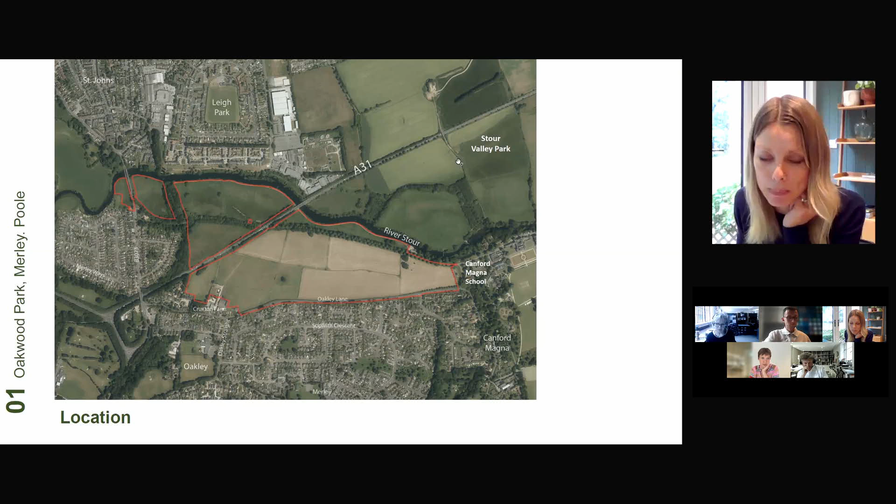A little bit about the site: it's a greenfield site, promoted by Richborough and released from the Greenbelt. It's roughly 46 hectares, and was allocated for residential use - a minimum of 500 dwellings, a care home, and SANG. We submitted an outline application, underpinned by a master plan and a design code, and obtained outline planning consent last year.

The site is effectively bookended by two conservation areas, one to the east and one to the west. This is the built-up edge of Merley, which is suburban and low density, and turns its back on the site.

The A31 is elevated. It's a trafficked route above the site, below which you have the river Stour and the associated flood zones, which affect the bottom part of the site.

In front of which there is a wonderful treed carriage drive that was a former private route to the now Canford School, and that is now a public right-of-way which crosses the site and leads directly into Wimborne, where there is an array of local shops and facilities.

Other considerations are that the site has challenging topography in certain areas in the centre. There are services beneath it that you wouldn't ordinarily know about. And there are a series of lovely trees and hedgerows, some of which are veteran.

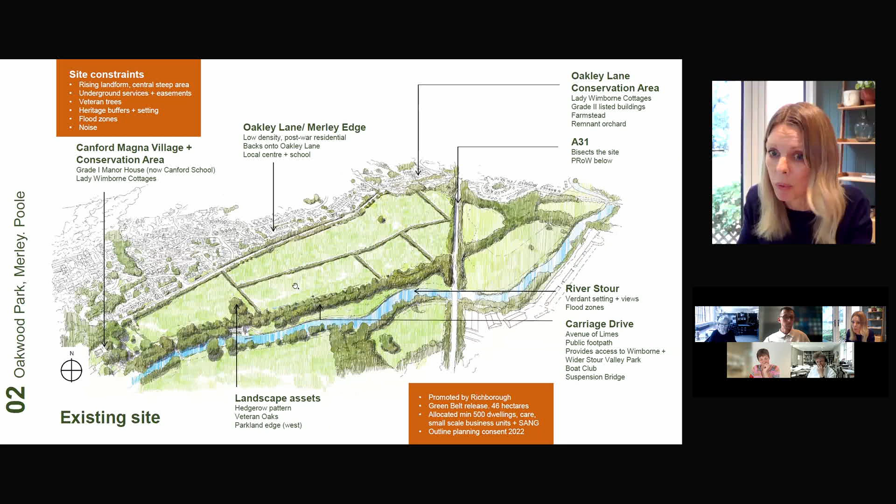A little snapshot about the context. The images on the left here show Canford Magna Village, wonderful arts and crafts buildings, rural character landscape led. This is the approach into Canford School by the side of the site.

These are locally regarded cottage pairs known as Lady Wimborne cottages, which have a distinctive buff brick, Gothic style arched windows and a gable front design.

Along the carriage drive here, you have a wonderful Victorian suspension bridge, which gives way to the Stour Valley Park. This is the carriage drive with the site on the left-hand side rising above it. And this is a wonderful gateway bridge known as the Lady Wimborne Bridge, which signifies the entrance into the carriage drive as you move off the streets that lead into Wimborne.

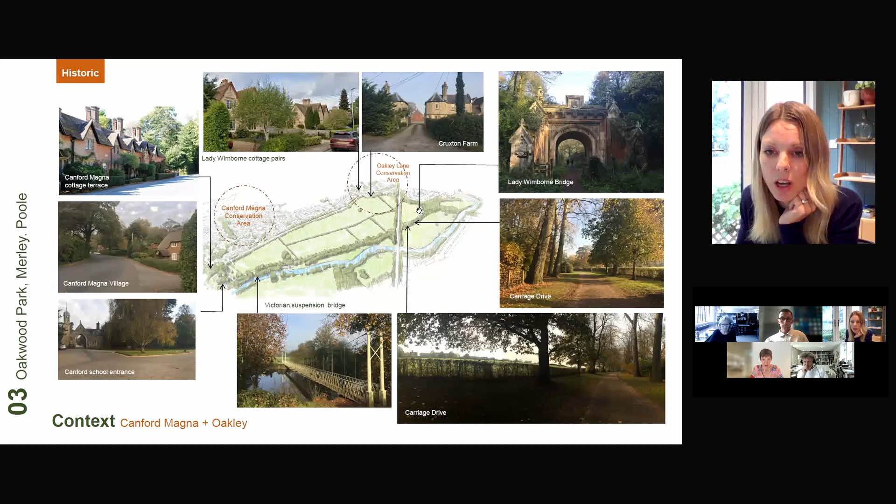So the street design is founded on an organic, deformed layout, and it aims to create a well-connected, safe and attractive environment that funnels movement, cycle and pedestrian movement down to the carriage drive, which acts as the linchpin for the overall movement and green space strategy.

The layout and patterning of development is founded upon best practice urban design principles, so it's block structure really, and aims to create a series of locally inspired development character areas that stitch into the setting of the site and its surroundings. But inclusivity is at the very heart of this scheme.

Its size and scale afford the opportunity to increase local housing choice, affordability, and mixed tenure housing, including care, adaptable housing, self-build plots, providing for people at every stage of life.

This is all predicated and founded on an extensive new parkland and SANG, which opens up the site to existing residents and new, and fosters community spirit. A series of green corridors stem from Oakley Lane, from the existing neighbourhoods, and give way to a new neighbourhood park, children's play, nature trails, communal food-growing areas, ensuring that access to green space and nature is easy and meaningful.

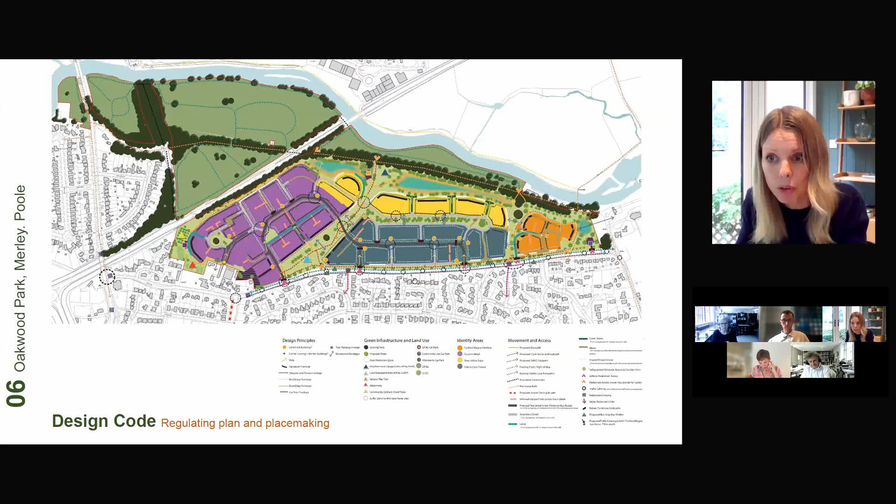Those parameters are tied into a structuring plan. So this is a regulating plan, which captures the placemaking principles and all the parameters. The areas I'm going to focus on today are the four coloured areas, which are the identity areas. These are extracts from the design code.

So each chapter details built form and landscape together, and it uses a series of sketches and annotations and lots of precedent images to convey the functionality of each character area, its response to its context, and also its role as part of the overall master plan.

The area I'm going to talk about first is called Cruxton Mead. It's the purple area that responds to the conservation area over here. It's the mid to high density area, which provides a series of gateways. The emphasis is on family housing, and it takes cues from the hinterland around the more historic parts of Poole and Wimborne.

It's all focused around a central formal tree-lined street, which gives way to a series of side streets, mews and edge lanes. The streets are punctuated at a series of points with widenings that create a series of informal parks, greens and squares. A traditional vernacular is in mind for this area, using varied building designs so that the townscape dominates and buildings lead the way as you move from one part to another.

Along the edges, we identify opportunities for landscape restoration. There are some areas that remain from the agricultural uses associated with the site, which could be enhanced and drawn into new green spaces. We identify the opportunity for new built form to replicate some of the architectural forms of the Lady Wimborne cottage styles around, so the imagery and diagrams relate as much to landscape as they do to built form.

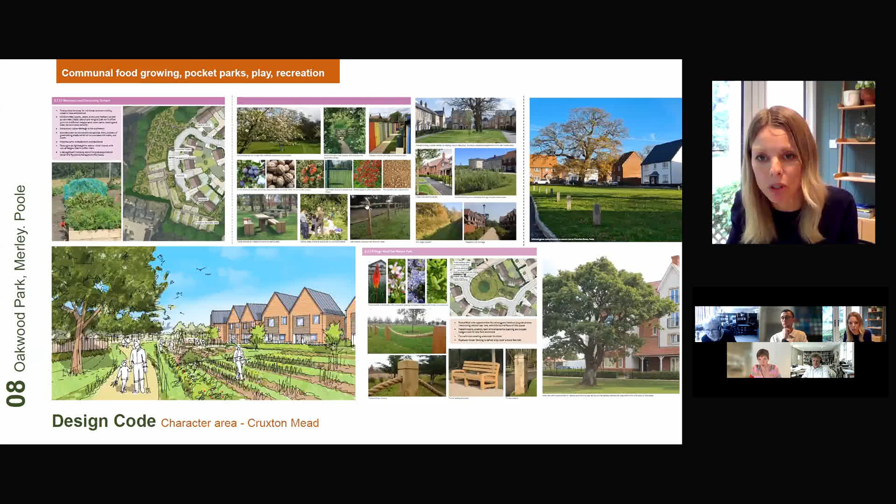The next area is called Oakley Lane Formal. This relates to Merley. It takes cues from the formality of the historic parts of Georgian and Victorian architecture in Wimborne and Poole, and creates a series of additional gateways that tie up with streets to the Cruxton Mead character area, with more continuous frontages, an active frontage onto Oakley Lane Formal, with key building groups and perhaps some taller buildings that define a series of entry points.

Having lots of entry points into the scheme was important for us because we wanted it to be as permeable as possible, but also entry points are helpful from a delivery and phasing perspective too.

The density degrades as it comes into the centre of the site, where it overlooks a new treed glade. That glade soaks up an awkward level change as part of the green infrastructure and creates a natural break to a new character area in front of it, which addresses the character of the carriage drive.

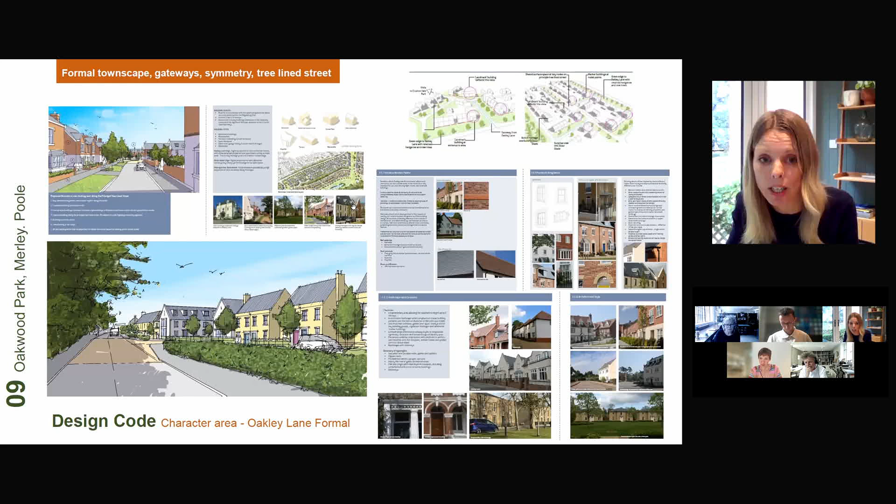Which leads me on to that - this is the Stour Valley Edge. This is a response to the carriage drive and the Riverside setting beyond it. It takes cues from the St John's area of Wimborne, with references to the Canford estate threaded throughout it.

It creates a semi-rural setting by way of more loosely arranged blocks with sylvan views of the carriage drive. Green mews across the development blocks range on a north-south axis, allowing street trees to permeate through the area and then relate to the parkland setting that surrounds it.

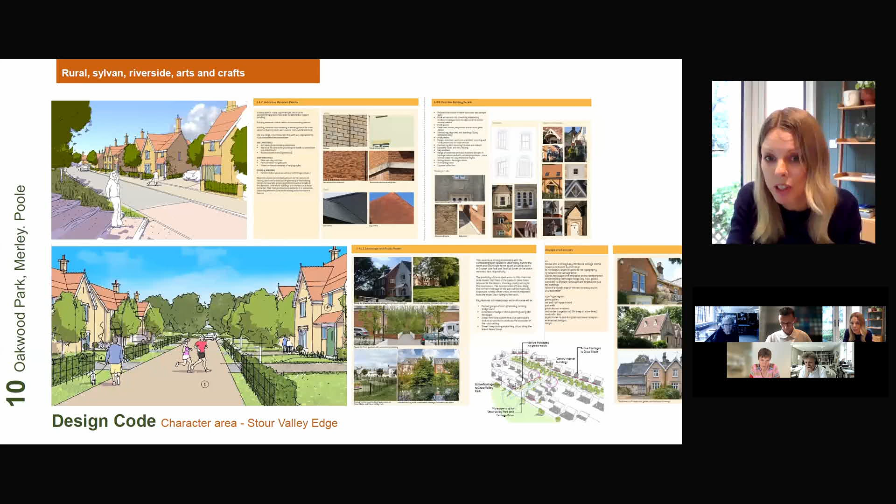Key features of this space include a crescent-style space which envelops a series of veteran trees next to the carriage drive, streets that give way to views of the carriage drive, quiet edge lanes with generous frontages for landscape, but also a very meaningful landscape buffer along the full length of that carriage drive, which is opened up for pedestrian and cycle access, and features a secondary avenue of trees, which protects and safeguards that tree character of the heritage assets.

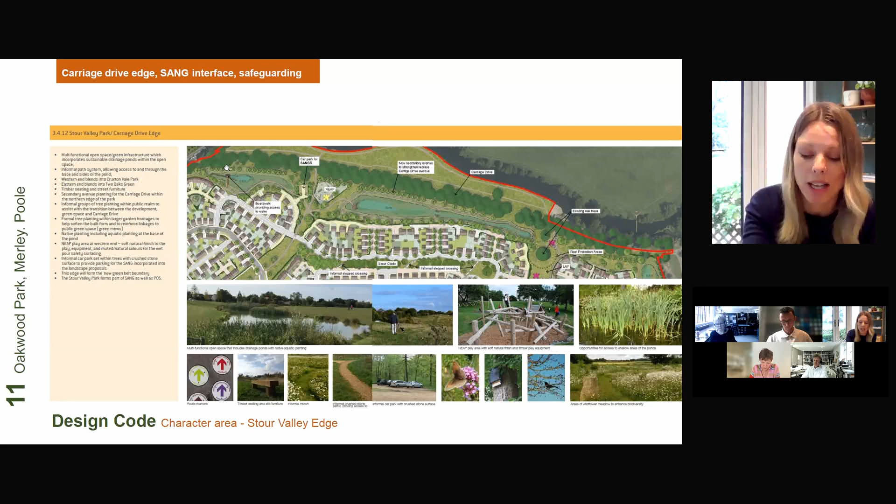The last area I'll describe is the Canford Magna interface. This is the area next to the school, and it's hinged on the provision of a series of very well-considered buffers. These were tested through discussions with Historic England that create an appropriate edge treatment to the carriage drive, the school, and the edge of the conservation area.

A curved Dorset terrace leads you into the central part of the site, which is terminated with a view of a new Lady Wimborne cottage pair, from which a series of quiet lanes branch off.

This area aims to create an arts and crafts style frontage to Oakley Lane, car-free frontages that complement the buffers to the carriage drive and the approach into the school, and a series of splayed building lines that incorporate views of existing Lady Wimborne cottages into new streets and open spaces.

To finally conclude, we produced a series of watercolours to assist our discussions with Historic England. These are some of them. This is the Canford Magna area I've just described, showing the curved Dorset terrace and how Lady Wimborne cottage adaptations could be incorporated into a new parkland, and this is the carriage drive alongside it. These were really helpful for discussions with members and the planning authority.

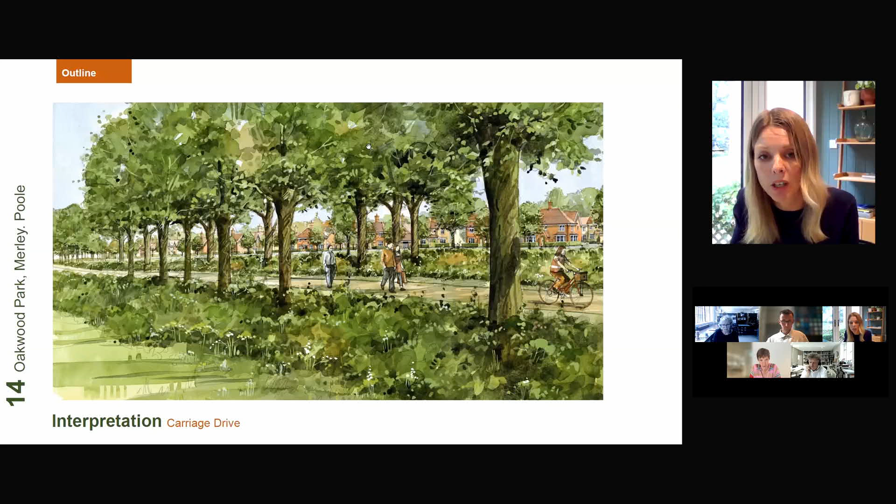This is a view of the Stour Valley edge I've described in front of the carriage drive, and you can see the secondary avenue just behind it, with the frontage very much being subservient to the sort of landscape features that define it.

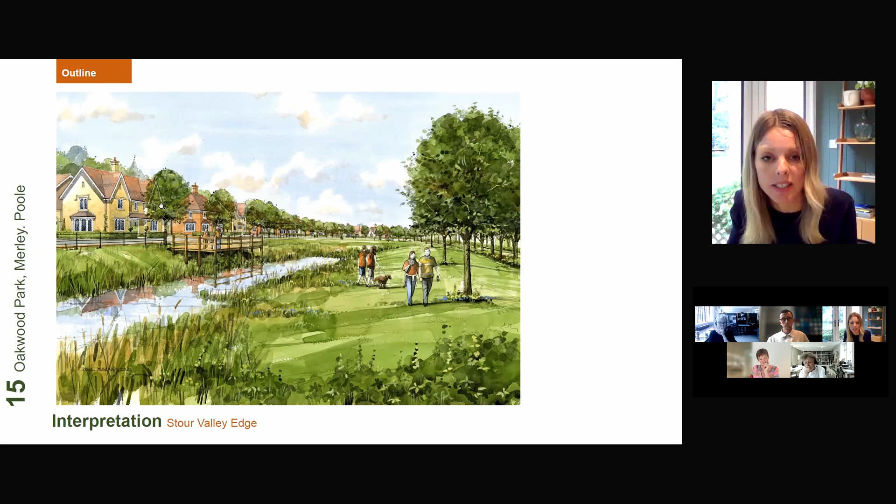This is the view from within the site. Because part of the edge and the buffer to the carriage drive envelops a series of flood zones, we created a series of ponds and basins with pontoons and boardwalks that allowed that area to be used when it was more wet, with a lovely frontage featuring Canford estate architecture in the vernacular.

And then finally, a view of a pocket park in the Cruxton Mead area, the first area I described, all focused around a really lovely oak tree. You can see the traditional vernacular is reflected in these buildings here.

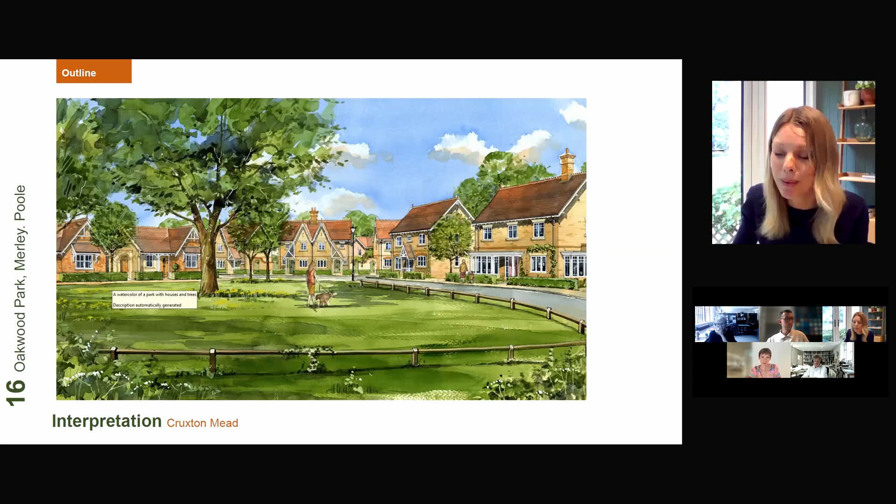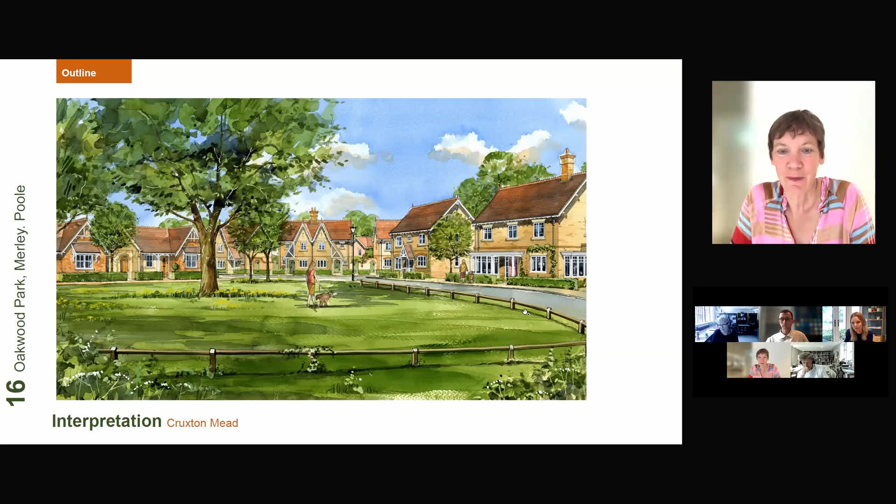Thank you very much, Charlotte, for talking us through the project and your submission. Anyone else in the audience, please do add questions for Charlotte into the chat. There's one question from the judges: how are you going to take this forward once it has outline planning? Who's going to deliver it, who's responsible for the delivery of this vision and the quality, and who will look after the landscape in the future? Do you have answers to those questions already?

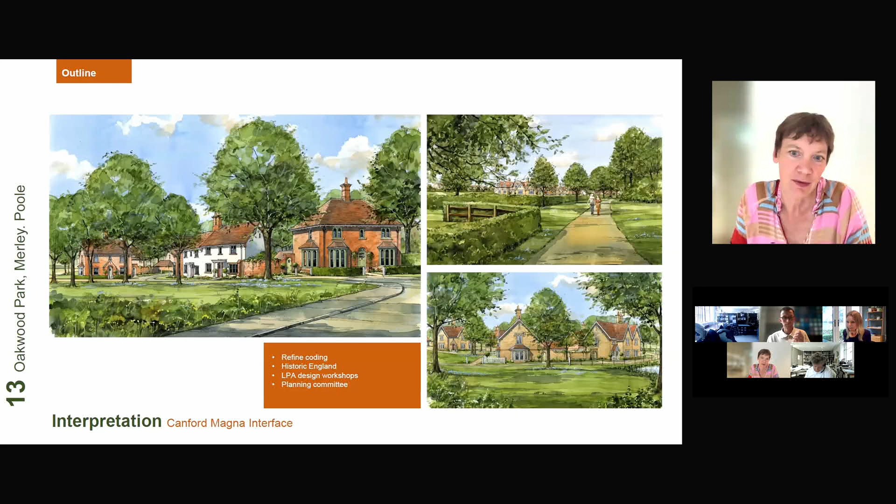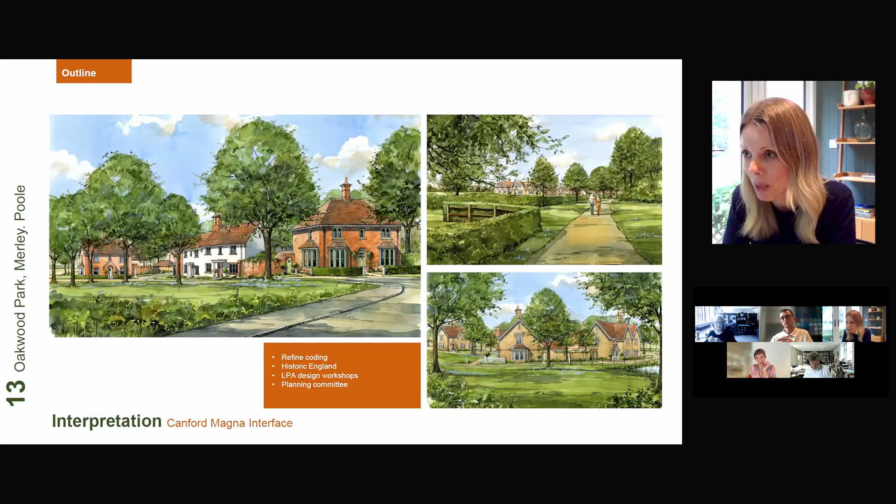There's another one from Jim Selby asking how the SANG is accessed. There was a requirement for the SANG to come forward at the earliest stage of the development, I think by first dwelling occupancy. The SANG is accessed via a green corridor link that stems from Oakley Lane. I'll just show you: this area flows from Oakley Lane down towards the carriage drive, and streets deliver a SANG car park, then you use the carriage drive and the public right of way to access the SANG, which is this area here.

Does that answer your question, Jim? I take that as a yes. I hope so. Are there any other questions from the group? Otherwise I would ask, what was your biggest challenge in this project in terms of creating and taking forward the vision and the quality you're seeking?

I think two things. The concept, agreeing the approach with Historic England, was a key part, and we involved them at every stage. But it took some negotiation and was fairly difficult sometimes, because this is an outline scheme, and deciding where you draw the line on detail, and how relevant that level of detail is to demonstrating your principles are right for context, was sometimes a struggle. We felt the outline scheme was being drawn into unnecessary levels of detail that might be restrictive for designers at the reserved matters stage.

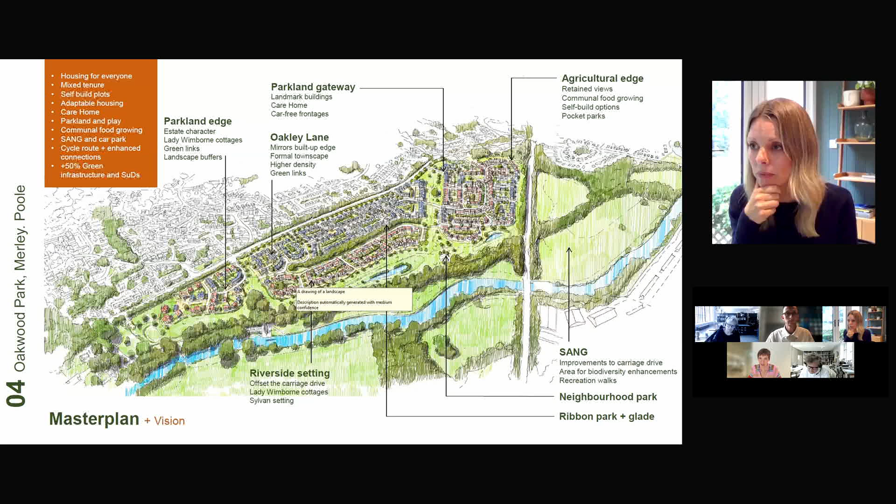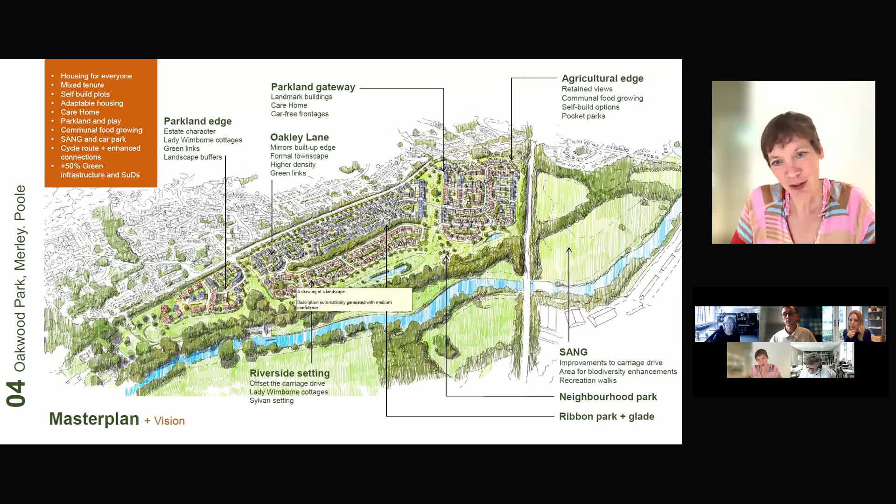Another question from Angela: how did you secure the typologies, especially the terrace housing? Sometimes that can be a challenge to get new terrace housing built. The typologies of housing weren't fixed. Each character area explains the density approach and the intent, the response to context and its role as part of the overall master plan, but it shows a series of building types that could form part of that context, using precedent images to show how they might translate themselves as part of a detailed design. But the onus is at the detailed design stage to show how those terraces might manifest themselves.

But does the code have minimum density requirements? Are you setting a minimum density that the development needs to achieve? Yes, it does. The density range is between 20 and 38 dph. So you can see that those densities respond - this is the density plan, and those densities respond to the character areas.

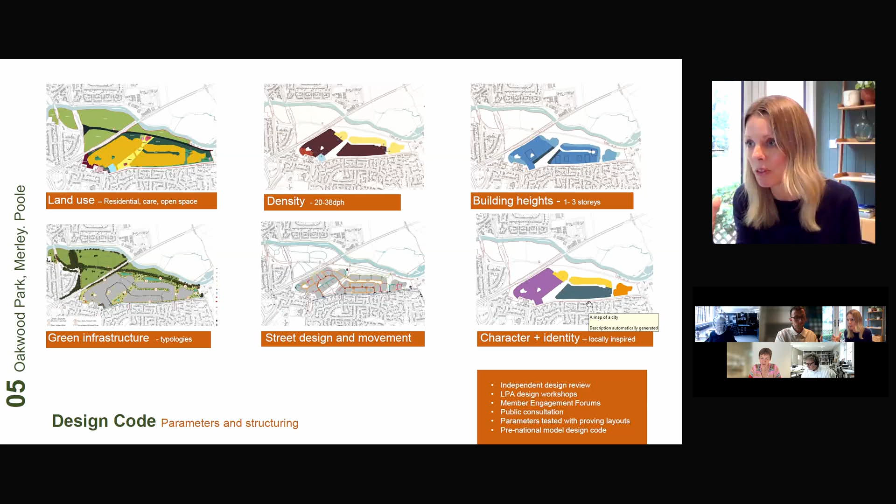One last question, a tricky one from Jennifer: how would you define the success of this master plan? How do you measure success in your company? Personally, I think it's good to be recognised and to be able to present at this stage, but also good to see how the design code has been translated through the Reserved Matters design. Perhaps I should have included that as part of this presentation, but because we undertook a testing process that proved these parameters at the outline stage, it designs out hidden things that can change the design at the detailed stage. So everything has flowed through just as we wanted it from between outline and Reserved Matters. I think that is the success for us, seeing how those ideas translate and manifest themselves as they go through detailed design and ultimately get built.

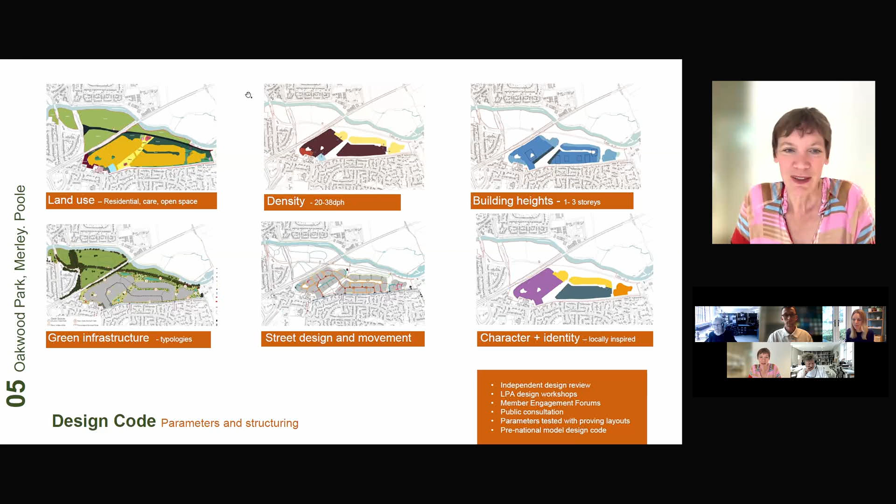It is the Lowline Commons, a much more urban project. The judges have identified the complexities for this project as working across several local authorities with business improvement districts, multiple land ownerships, and a very wide range of land uses. They recognized that it is effective in responding to its context and the different scales of intervention that were required, dealing with a very complex set of questions and challenges. So really looking forward to hearing about this project from James Blower from Macfarlane Associates.

Thanks very much, Katja. So my screen should be being shared now. Thanks for the introduction. My name is James Blower, an urban designer from Macfarlane and Associates. We're a placemaking agency based in London Bridge, actually in and amongst the study area for this initiative that I'm going to present to you now.

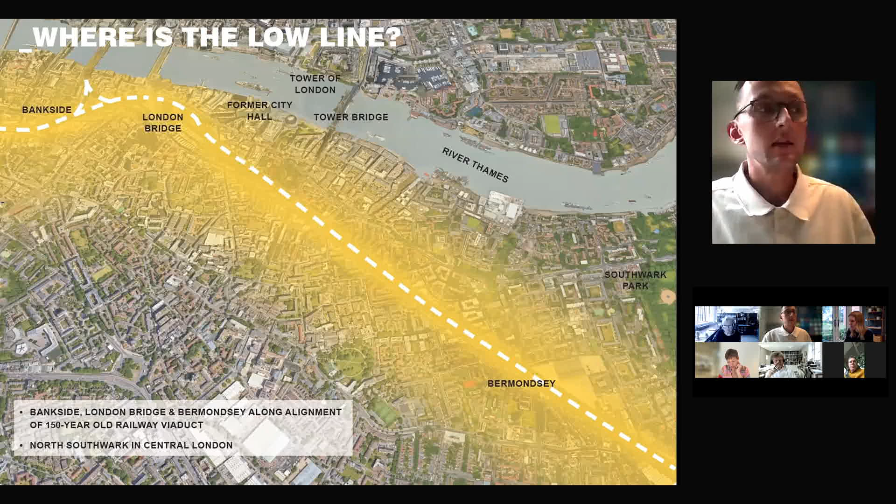The Lowline is a 2.5 kilometre railway viaduct that dissects the northern part of the London Borough of Southwark in central London, spanning very diverse areas such as Bankside, London Bridge and Bermondsey.

The Lowline was a strategic concept, a term coined by ex-architect and local resident David Stephens, who you can see up in the top right here. He envisioned celebrating the fantastic heritage of these 150-year-old railway arches, one of the biggest built structures in the city, by creating a new walking destination from London Bridge through Bankside and Bermondsey, connecting diverse neighbourhoods.

and communities, linking existing and new hubs of creativity along its course. The concept was developed by a group of partners around 2010-2011, and in 2019 they ran an enormous international open competition, which attracted about 100 entries from 35 countries. The brief was to create a green strategy under the umbrella of the Lowline, underpinned by the Victorian railway viaduct, increasing environmental resilience.

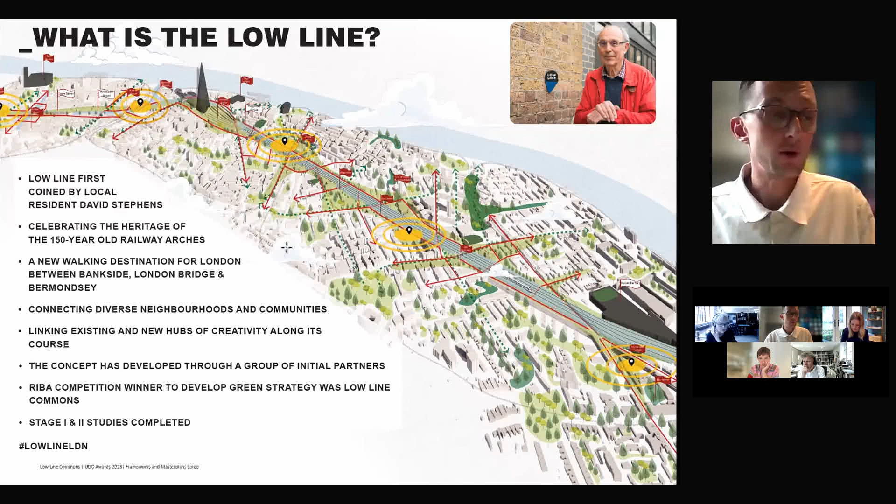Sorry, James, you're cutting out for me a bit. Is it just for me or is it for others as well? My apologies for that, I'm hovering immediately above my laptop.

So the Lowline partners are a range of organisations, but this was fundamentally pushed through by business improvement districts - Team London Bridge, the Blue Bermondsey, but first and foremost, Better Bankside. And it was our group of consultancies, designers, sustainability consultants and ecologists who devised the concept, the initiative, the Lowline Commons, which went on to win this RIBA competition, and was then funded by the Mayor's Good Growth Fund to the stage that it's at now.

So our vision for the Lowline Commons was that through the implementation of green infrastructure, this barrier, this viaduct, could become a green seam, stitching together a vast network of spaces that make up the urban fabric from Bankside to Bermondsey - capitalizing on increased permeability and connectivity, and using the viaduct as a common and unifying element to tie these networks of spaces together.

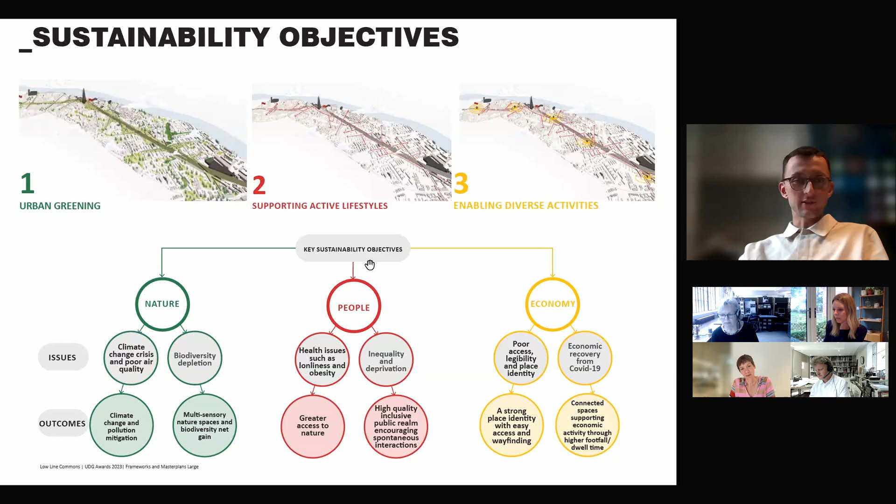As the Lowline dissects a huge array of character areas, we thought that to devise a strategy to bring this together as a cohesive whole, we needed to characterize areas based on character areas and design appropriate solutions for each. These also largely aligned with the administrative boundaries of the business improvement districts. So not only are the areas that the Lowline viaduct passes through diverse as character areas, the types of spaces that surround them are also diverse.

This mosaic of streets we categorized based on varying opportunities for interventions and urban greening. And I'm going to come back to this in a little bit more detail shortly.

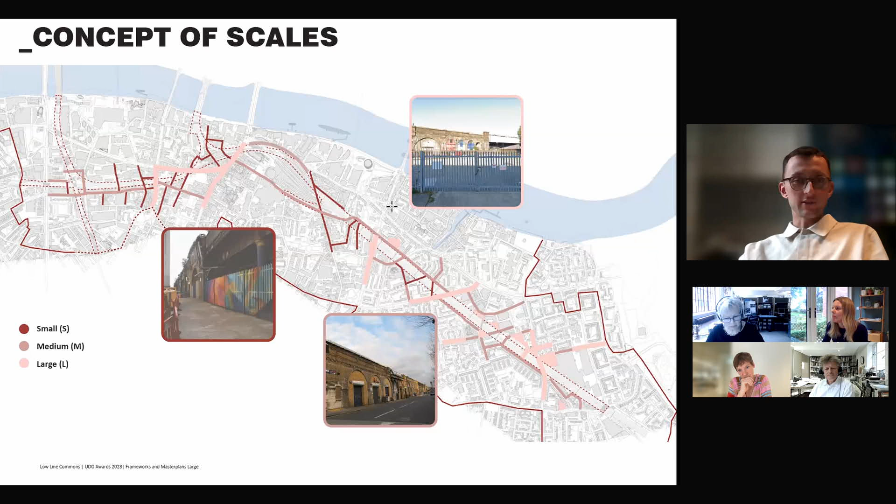So having these kind of lofty plans and dreams as part of this initiative would always ultimately remain that way unless we set ourselves measurable targets and goals that we could move towards and benchmark ourselves against. These targets were designed to ensure that nature is at the heart of the Low Line, and I'm sure you'll all agree these numbers are very laudable.

In a nutshell, integrating nature-rich streets along the viaduct has the potential to transform this area. Anyone who knows it knows that it's devoid of nature at the moment, largely. Creating more welcoming spaces and forging the idea of an identifiable green seam, bringing people and nature together, and ultimately contributing to London's status as a national park city, the first national park city.

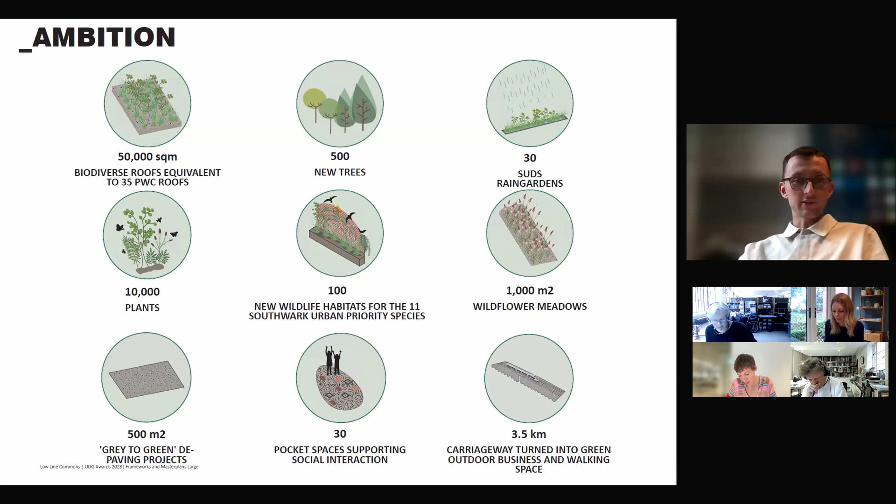So we looked to engage and bring along on the journey all stakeholders - active people and groups along the railway corridor - to ensure that the benefits of the Low Line extend far into the future, far beyond the days when I champion it as an individual and my consultancy are involved.

It requires the support of the partners along its length, making sure that the benefits reach far into their communities. Translating sustainability into practice is a way of encouraging a shift in mindset, challenging the status quo by demonstrating the potential of green infrastructure - a truly regenerative approach.

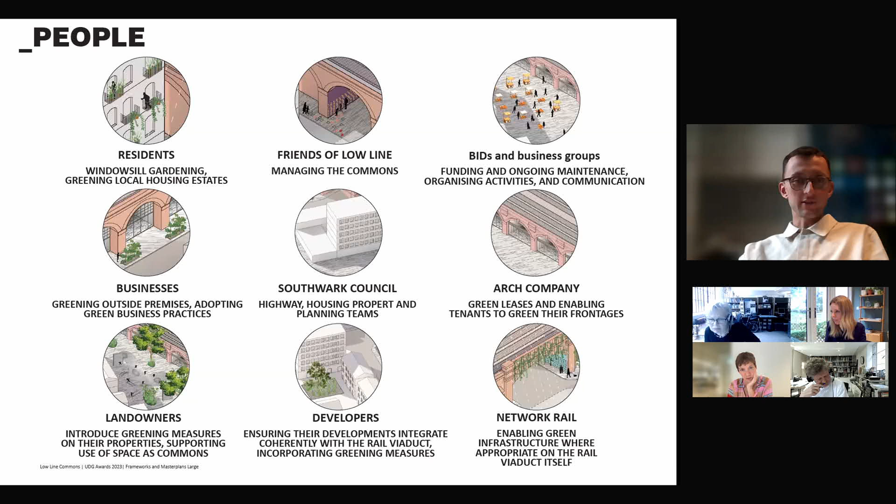Our intention through the development of this wider strategy was to make the whole greater than the sum of its parts, binding the impetus and passion from these local organizations, these great local scale tactical initiatives, under one strategic umbrella, offering stakeholders a guide to planning, designing, and ultimately bringing to life projects within the umbrella of the Low Line. Shared action and engagement by a different range of stakeholders, creating a positive environment for shared benefit.

It's a powerful unifier, a bank of inspiration for local stakeholders to draw from. It's not meant to be prescriptive in any way, but a springboard for creative ideas - merely tools that can be adapted for place-specific solutions.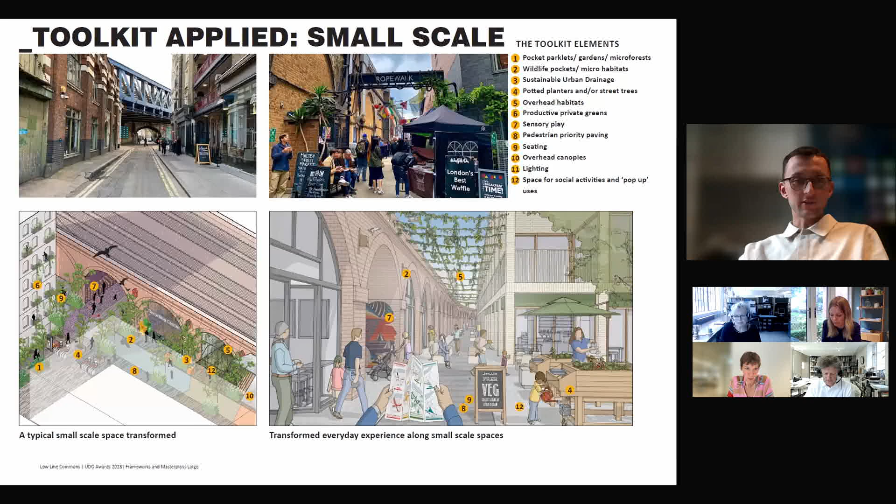So here you see how we envision the application of the toolkit in a range of spaces. I'll just flick through these as I speak. The physical characteristics of each space, of each scale of space, offer different opportunities for people, nature, and enterprise to flourish. So scale will have an important influence on how our interventions are delivered.

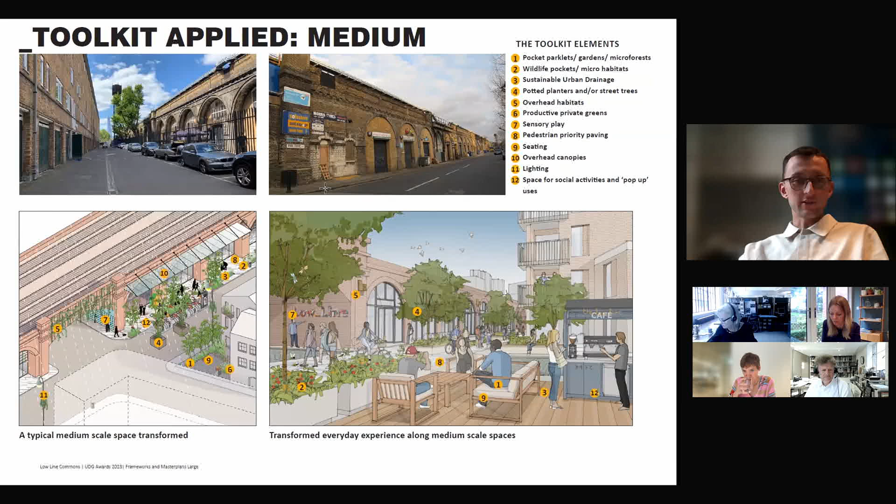Sense of enclosure being a key one, space and priority for vehicles and parking, and of course environmental factors like sunlight and shade.

You can see this key on the right, which indicates how we envision the toolkit you saw on the previous page being applied in each of these spaces.

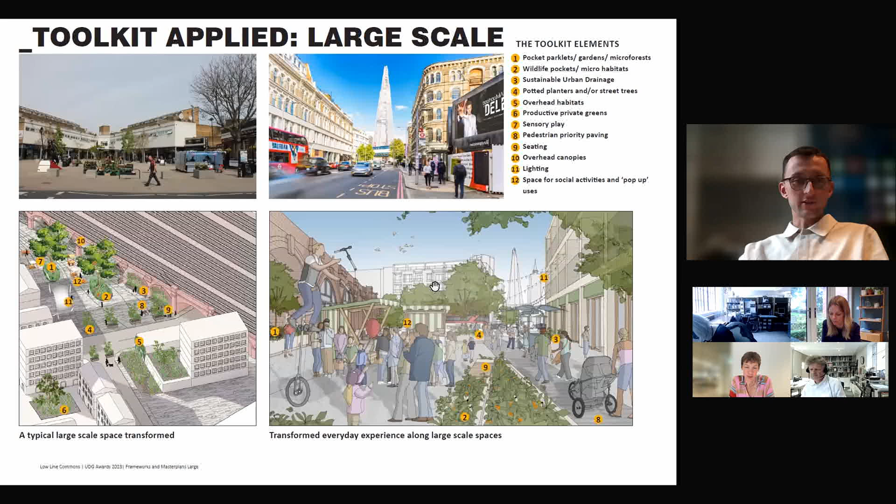These studies are a kind of critical resource, really, an enabling framework, a springboard for ideas for everybody committed to transforming the low line and the immediate context, this part of London, from a piece of transport infrastructure acting as a barrier to a robust green corridor which brings together these diverse neighborhoods.

Taking the thoughts and designs from this report to something tangible and real is the ultimate goal for all of us. For this to meaningfully benefit the community, it requires a robust engagement strategy to discuss the vision with local stakeholders and devise a shared plan for implementation.

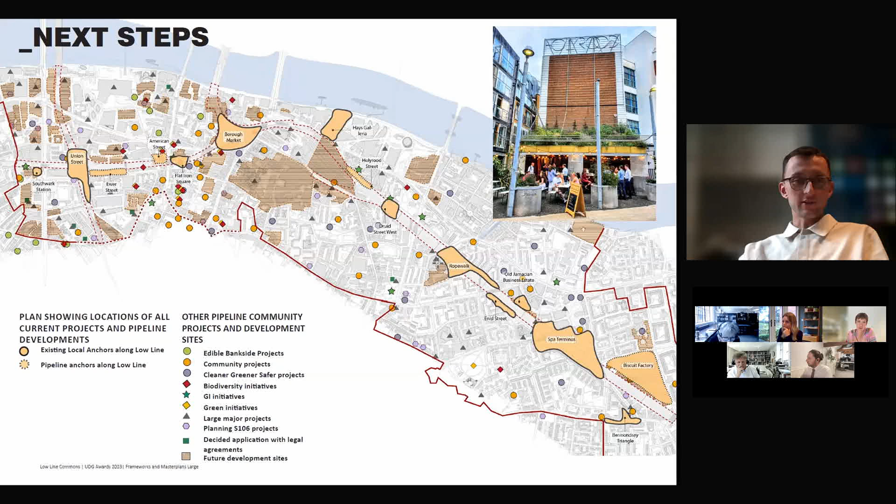So I'd like to just close by saying that we really think this is a truly regenerative, truly unique, bottom-up participatory regenerative initiative - by the people, for the people, and with the people, inclusive for all, but importantly, making new places for people and nature to thrive.

Thank you very much, James. Thank you for talking us through it. It's kind of truly diverse and complex project.

And again, I ask everybody to put your questions into the chat. I will start off with one question that came from the judges' comments. You've talked already a little bit about the delivery mechanism. So the challenge is lots of great ideas, and as you say, a toolkit and a springboard for inspiration. So how does this become reality? There are so many different partners involved - Network Rail, the local authorities, and private landowners. Have you had conversations with all of those, and how was this kind of received, and are they ready to implement, and how?

That's the $1 million question, Katja. Yeah, we've been talking to the stakeholders, and ultimately some more than others are on board - I won't mention any names about who those are - but it does require buy-in from each of the key stakeholders, because with this myriad of land ownership, it's impossible for the vision we have for the entirety of the railway corridor to be transformed in one go.

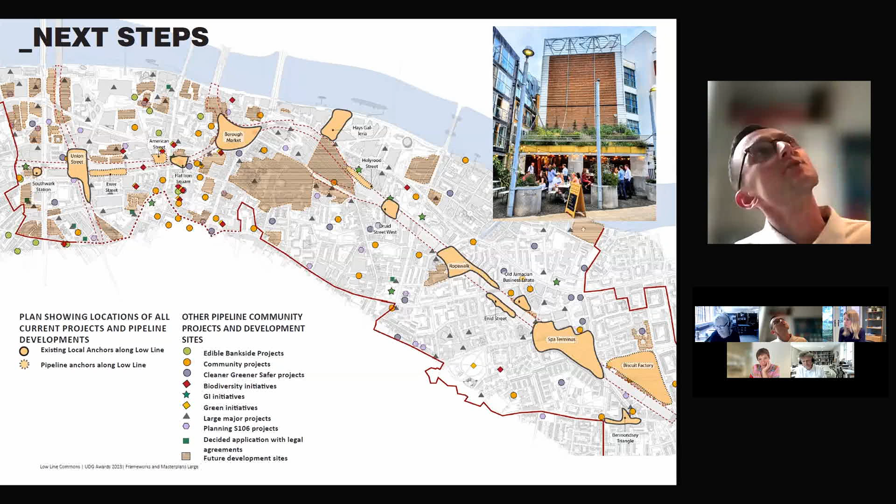And they're acting as catalysts for further regeneration, ultimately encouraging the other stakeholders who are big organizations - they're harder to move, harder to persuade - to also get involved more, because this is a win-win for everyone. So the decentralized concept is both the great thing about the low line and the hardest thing about it, because there's no one organization leading it forward. But that's what's exciting about it - it's interpreted in different ways, coming forward in varying degrees at varying points along the low line. Yeah, thank you for that. That was a very long-winded way of answering your question, I'm afraid.

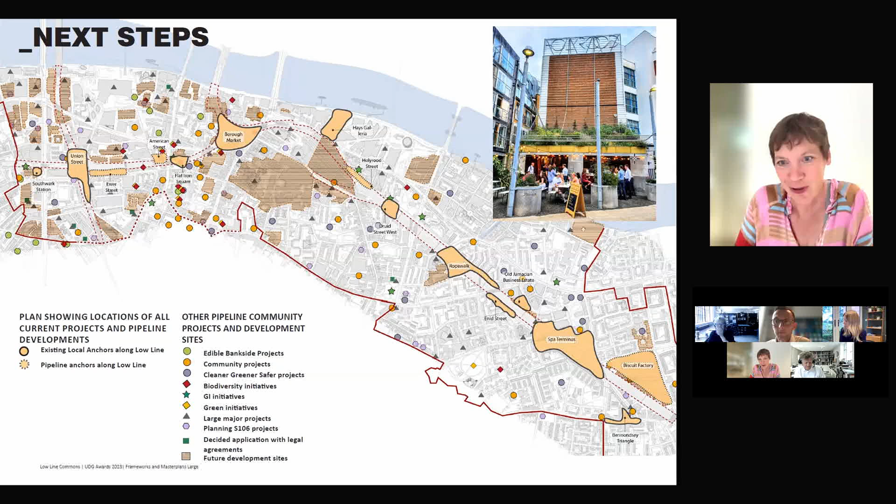That answers my question. And I think, we are based in this area as well, walking around it, seeing the transformation - it's really good. And I must admit, that railway cuts through all the urban fabric. I still get confused constantly in the area, crossing under the railway, and it would be a great piece of work if that comes forward, connecting all those different dots. Absolutely.

One thing I was going to say is that within the umbrella of the low line, just to give a greater understanding, the initiative I just presented is one strand of it - the greening, the green infrastructure strand. There's also a movement strategy, which involves punching through some of the arches to create better permeability - that's another strand. And the final strand is about installing prefabricated modular corrugated units into the spaces themselves, which are easy to put together and mount, cheap, allowing local businesses to use these spaces at very cheap rates. So it's a cohesive strategy when you look at it entirely.

I mean, there are a couple of questions. One is about - they're businesses, they're stakeholders, landowners, but they're also residents. So have you thought about giving the residents almost a kind of right to green, so they can do their part of it? And then there was another question: how have you dealt with the naysayers or the lack of chronic resource shortage for public realm and other strategic public works?

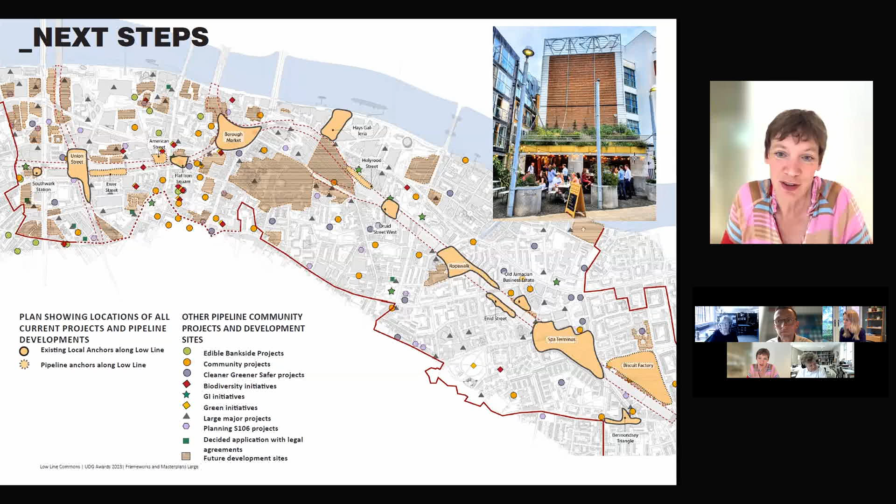Yeah, I can take the first one. I'll flick back to this page because it's amazing when you see the amount of work, the amount of initiatives that are going on and have been going on for a long time - some of you here might know about some of them. The champions of each of these initiatives are different - some are local non-profits, some are groups of residents within council estates who just wanted to make their immediate environment much more pleasant to be in. So there's already the will there of these people, these groups, to be involved and to create a nicer place to live and work and be in.

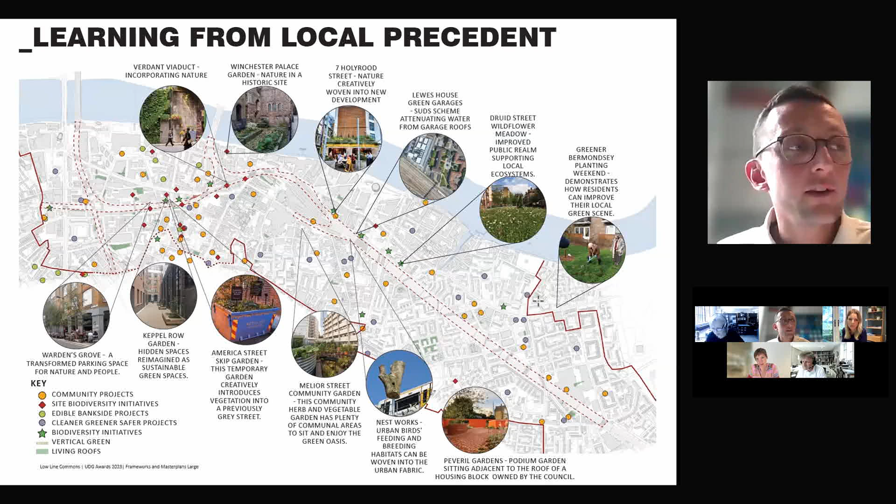So I hope that answers that question. And the chronic lack of resources, yeah, I think there's probably no shying away from the fact that the council aren't going to be the people to push this through.

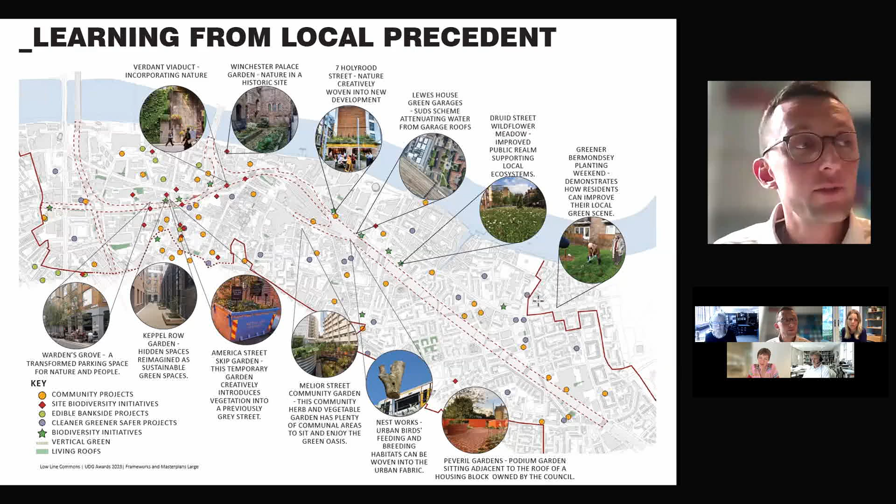But I flick back to the lowline partners. You can see there are other organizations that have greater financial backing, and whose interest it might be to engage with us as a team to bring certain initiatives under the umbrella of the low line, because ultimately it increases the value of their asset.

I'll leave it up to you to work out who I'm talking about here, but I think there is always money somewhere for this kind of stuff. It might not come all at once, but that's fine. The way we've set this initiative up is that it trickles in, into one initiative which then catalyzes another, and over time the area changes and improves.

So I don't think any of us envision that there needs to be immediate buy-in from everyone and money up front. There's one last quick question—you can see them in the chat as well and reply separately—about ongoing maintenance costs, always a concern, and whether that was discussed and dealt with in one way or another.

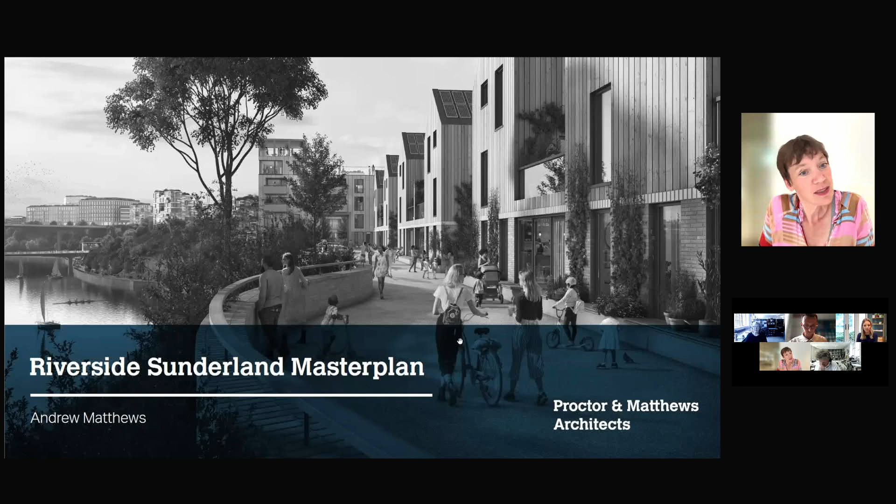And so now we're moving to the third presentation and the last shortlisted project from Proctor Matthews, Riverside, Sunderland. The judges recommended it as a long-term vision for regeneration of both banks of the river. It really converts an existing river backside into new city frontage, with a strong identity that links well to the industrial past. So let's hear from Andrew about the project in more detail.

So this is Riverside, Sunderland—quite an amazing project set right in the heart of the city, where there's quite a lot of vacant land. The overriding ambition for Riverside, Sunderland was to create an internationally recognised city centre development, but also, which I think is sometimes unusual, to think over a very long period of time about what kind of environment 21st century living could be in an older industrial city like Sunderland.

You can't really realise these projects without mentioning the incredible ambition of the client here, Sunderland City Council. This work was undertaken alongside Faulkner Browns, who looked at the central business district, and also Camlins, who were part of the team because there's major green infrastructure here. The headlines were innovation and research around sustainability—Sunderland wanted this to be, as far as possible, a net zero carbon development. They wanted us to draw on the local history of Sunderland and make a development about the context of this place, not a ubiquitous regeneration project.

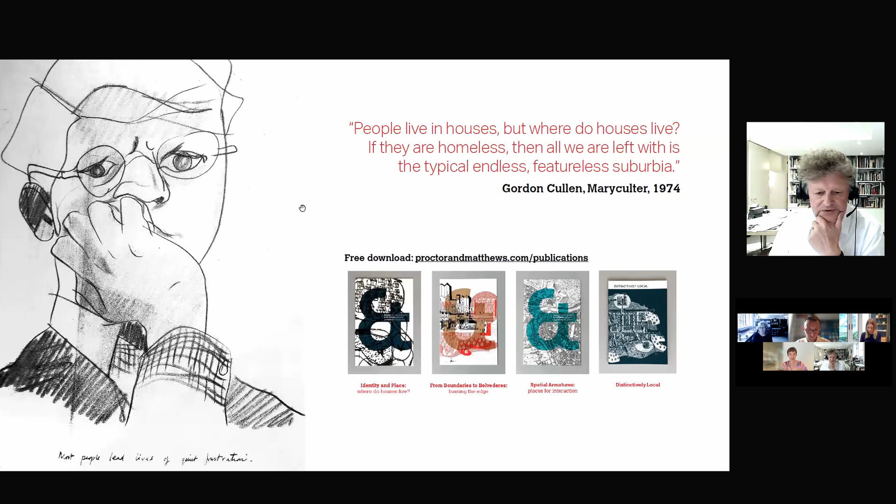This slide is quite interesting, and we use it a lot. It's as relevant to suburban areas as it is to city areas. People live in houses, but where do the houses live? If they are homeless, then all we're left with is typical endless, featureless suburbia. That's sort of what we always think about when we're trying to consider context and placemaking and the relevance of the cultural heritage, industrial heritage, particularly here of this place.

When you go back to 1768, what the Wear was, this verdant gorge, probably broadleaf woodland. You can see what it was like further west as you move up the river into the countryside. This would have been an incredibly wooded valley right down to the sea, running through the centre of the city, or the town as it was at that time. And of course, 100 years later, we see on the right, 1852, this amazing industrialization of the city, where in many ways both sides of the city turned their back on the river because it became so industrial and filthy, a sort of no-go area with coal drops that most people living in the neighborhoods would not really have gone to or known about.

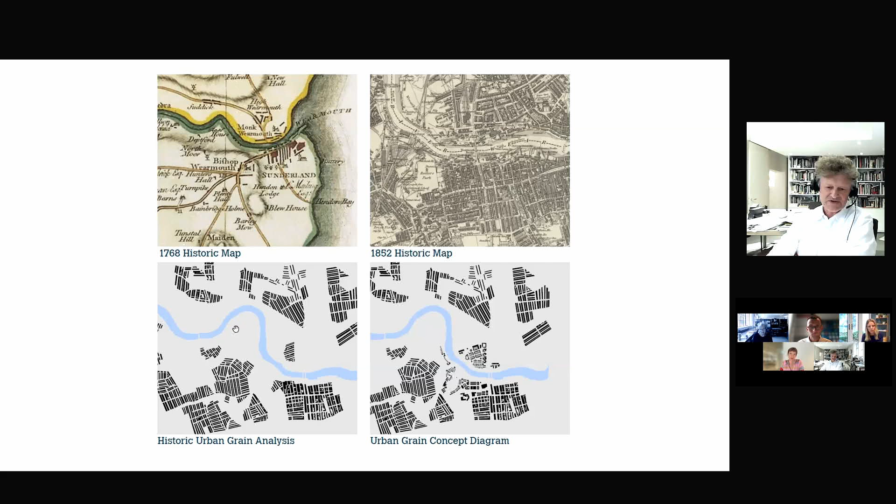There's a very peculiar thing that happens when you do a figure ground down there on the left. You get this quite unusual city grain, which we've not seen actually in cities before. When you draw a drawing like this, it tells you something about the morphology of the place. But it also tells you there are some unique things going on in terms of building typology that make up streets and characters that are really quite unique to Sunderland, and also unique to the broader northeast of England.

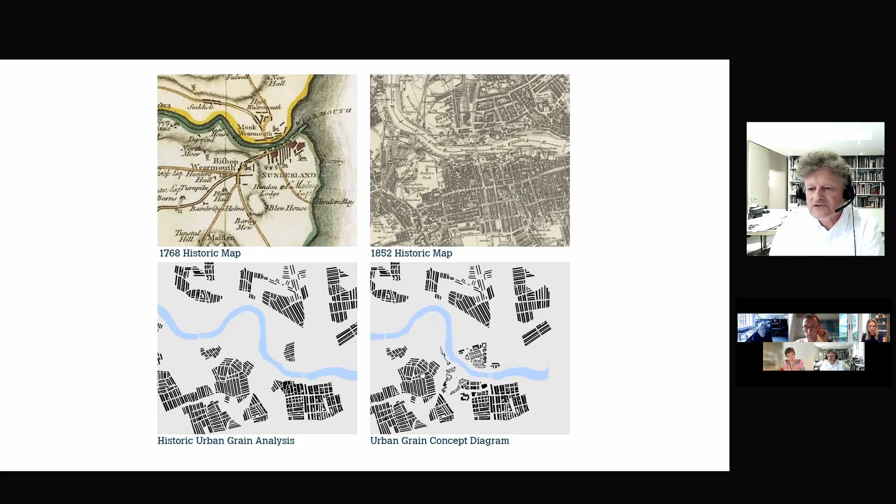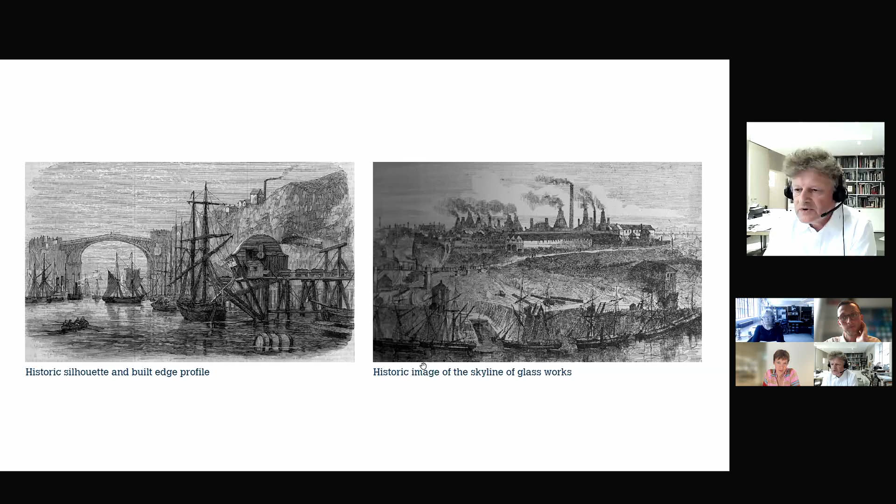Down on the right is the beginnings of our explorations of how you make interventions onto the river. These two historic images are interesting - they show what the industrial river was like, but also this amazing topography, a 30-meter gorge down into the river, onto the riverside, and the kind of industry of coal drop yards that occurred on the river, which was the only industry, and then the glass works and ceramic works that would sit up on the hillside, and the silhouette created of the city right above you when you were down on the river. So the silhouette is really important, I think.

So it's just some facts. This is 33 hectares of land, of which nearly 20 hectares are available for development. We want this to be, Sunderland wants this to be a carbon neutral development. They want to pioneer modern methods of construction and new technologies. There's to be 1,000 new homes here, schools, nurseries, more than 1 million square feet of modern office accommodation, some of which is currently under construction. The City Hall is currently under construction. There will be a culture house. There's the development of a life sciences building.

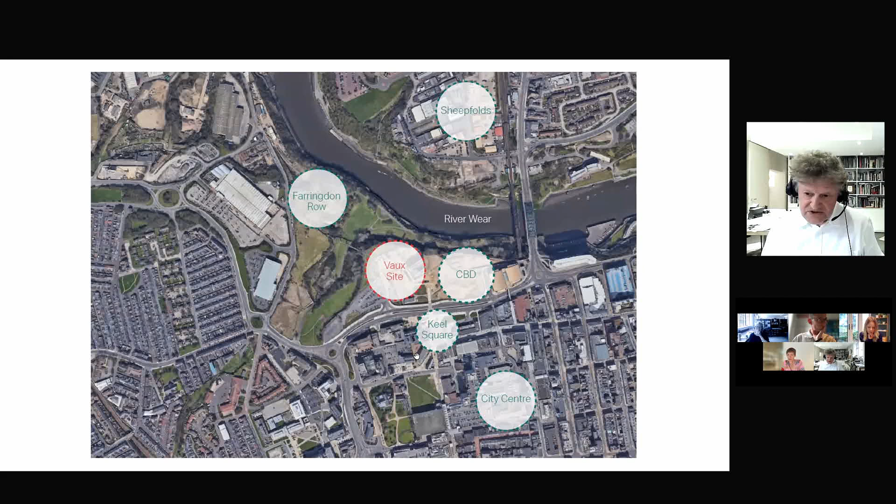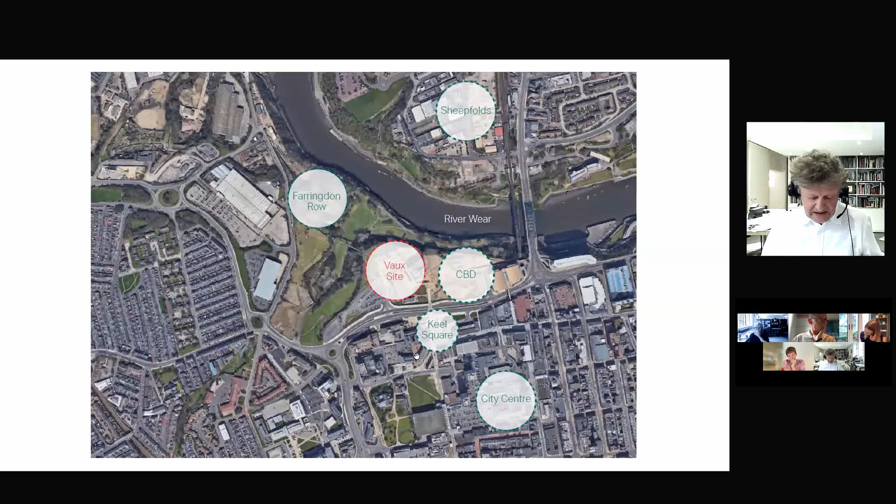There's this amazing landscape. There's the need to connect walking and cycling from our site down to the sea. And there is the opportunity to think about new infrastructure that can connect both sides of the river.

So here we are. Here's a view of the river, and you can see that even people living here, when we consulted them in Sunderland today, few go down to the side of the river because it's always been felt as a no-go industrial area. Even today, there's that sense that not many people go down to the riverside.

And yet there cannot be many cities in Europe that can sport such an amazing gorge running right through the centre of their town, and the opportunities that offers for health and well-being and the greening of a city into the future of this century.

So connections are incredibly important: the city connections, these neighbourhood connections across and down to the river. And then the site connections, these neighbourhoods we're looking at, Vaux, Farringdon Row and Sheepfolds, all of which nestle alongside the edge of the gorge looking down into the river.

And when you get to the edges of the gorge and stand on the top, the views up and down the Wear are absolutely spectacular.

We had a number of giggles among the audience when we were consulting residents of Sunderland, suggesting that they had something akin to an Italian hill town. And it wasn't until they walked out and saw for themselves just how special this was as a place that they began to understand there were some really amazing possibilities for the future of city living here in the heart of Sunderland. Sometimes it takes eyes from another part of the world to come and explain to people living in a place just how special it is.

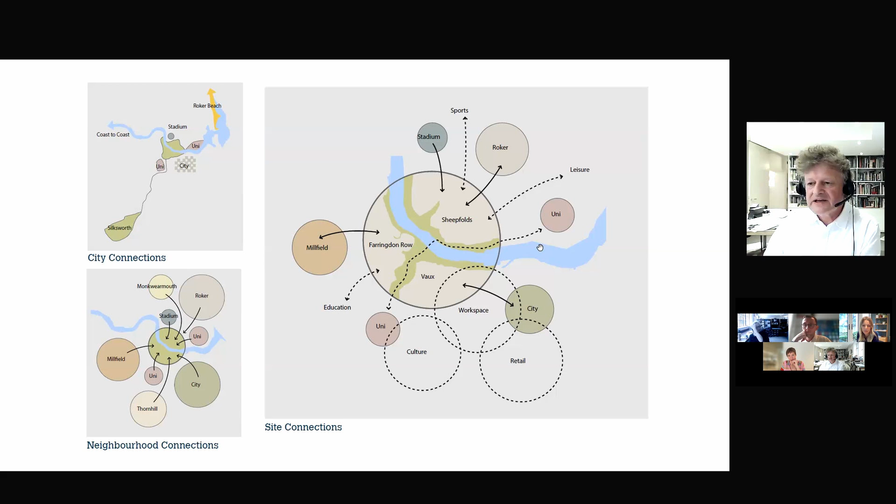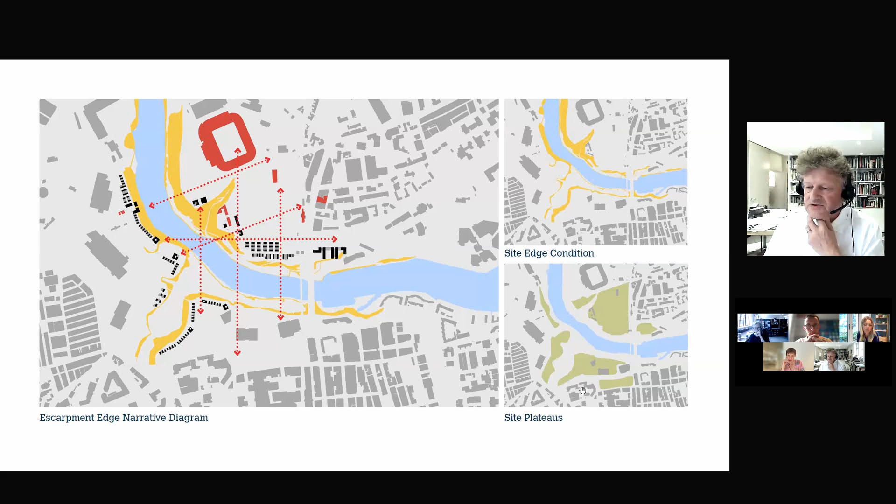So here's the edge condition of the escarpment shown in yellow on the right, and the site plateaus that are part of our site area that we are to consider development on.

And so an early master plan begins to work out how you can not only physically connect these neighbourhoods across the river, but also how you can visually connect them, and how we can take advantage in the new neighbourhoods of this new way of connecting landscape and living environments back to this city water lung that runs right through it.

And so strategic connections involve a new High Line bridge, which is funded, which runs from the Stadium of Light into Sheepfolds on the north bank, and will bring pedestrians right down into the central business district and Vaux, the new housing development, and into the city centre.

So this will be the first time ever that a bridge of that magnitude has connected north and south of Sunderland together. And then as part of the new Riverside Park, which has been designed by Camlins, which sits as a green lung in the middle of all of this...

...is a low level green bridge down at the lower level, which takes you across the river and connects you into all of the cycle and pedestrian networks down to the riverfront, to Roker over here, and then back into the citywide network to the south.

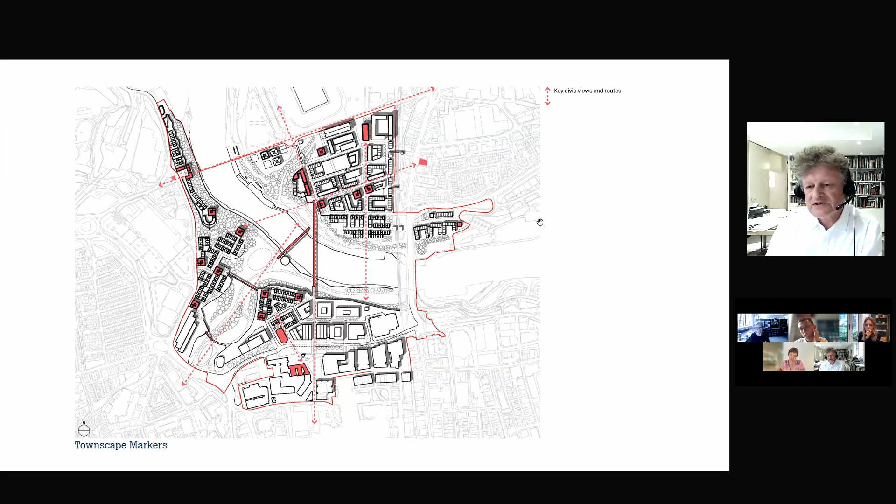So these two bridges, the Green Bridge and the High Line Bridge, are crucial parts of infrastructure that will be funded by Sunderland to connect the new neighbourhoods together.

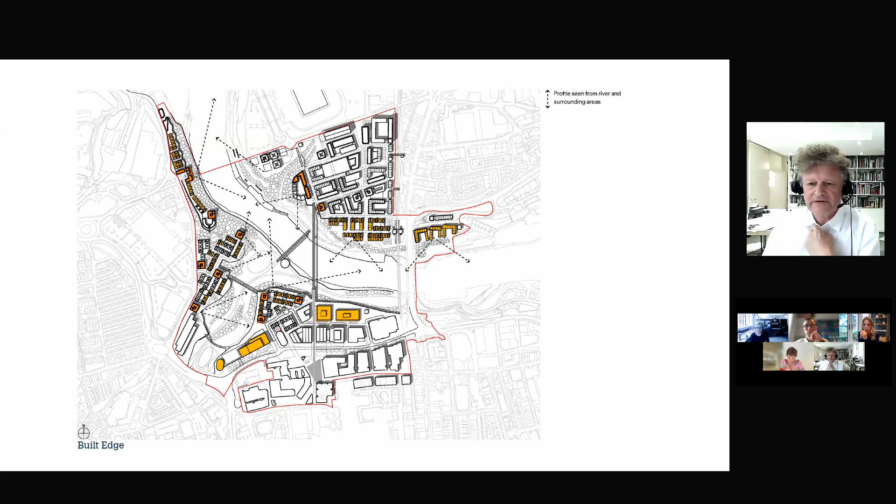And this is the built edge diagram, and we're beginning to think about how the buildings that sit directly on the edges of the river have a different morphology, different character, create a silhouette on both sides of the river, and how markers begin to address wayfinding, and how in the hinterland of those developments they respond to adjacent neighbourhoods.

So this is an early model which begins to show those strategic connections. We already have an existing pedestrian bridge across what's called Galley's Gill, another valley up here, connecting Farringdon Row over on this side to the development currently on site at Vaux. I hope people can see my cursor.

Okay, the low level green bridge, and then the high level bridge that takes you to the Stadium of Light. And then you can see as markers what we call peel houses, which I'll explain in a minute, that sit along the edge and at night would begin to show this silhouette and light this edge of the river that's never really been occupied by homes.

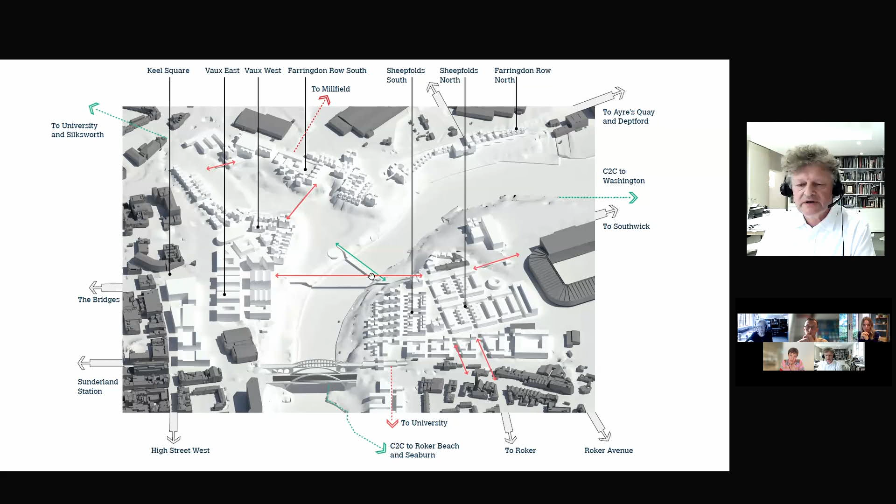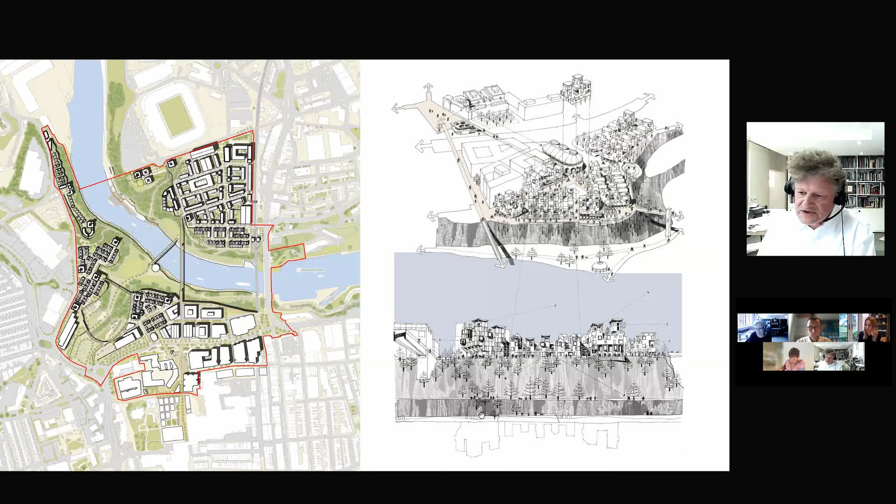And it's not just about housing. As I said at the beginning, this is a mixed use community, and Sunderland are as conscious about bringing community, civic, cultural and business life back into their city centre as they are attracting people to come live here, and to re-energize inner city living for our century. That diagram gives you a clue about just how mixed use the development is.

An early decision was taken to supply both the business district here and the housing on this side of Vaux, Farringdon Row and Ayres Quay with parking in a central parking barn, sitting here. This is being built by the council, and it will provide parking both for business people and for people living in these neighbourhoods.

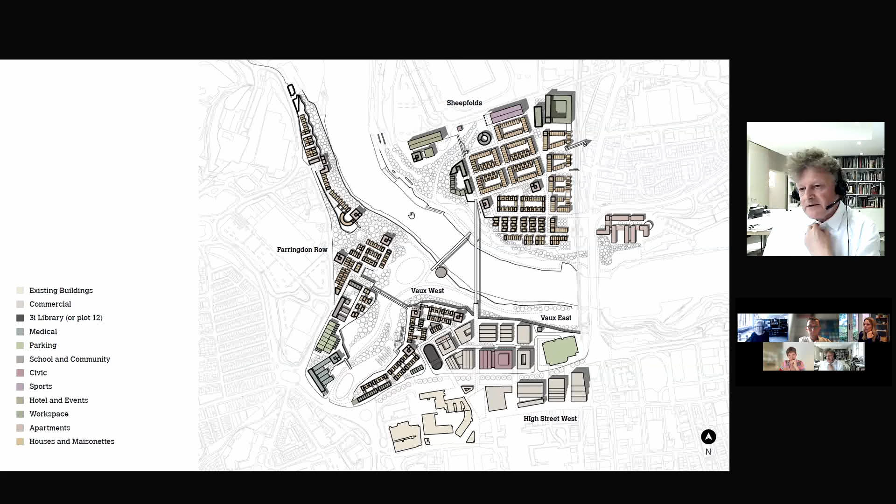This means we can immediately think about high density in a completely different way, because it allowed us to think about a public realm that is really about people. It also means we can future-proof things like charging and energy generation for electric vehicles in the future. So this is a really bold move by the council to say, let's take cars out of all of this, and let's make this the future of our city one about people and families and pedestrians, not cars.

So here's a bit more detail about how we were generating the silhouette along the city edge, creating this city edge promenade, this river edge promenade to the Vaux development. This is currently on site, connecting into existing bridges, delivering belvederes that give people opportunities to sit and take in the view.

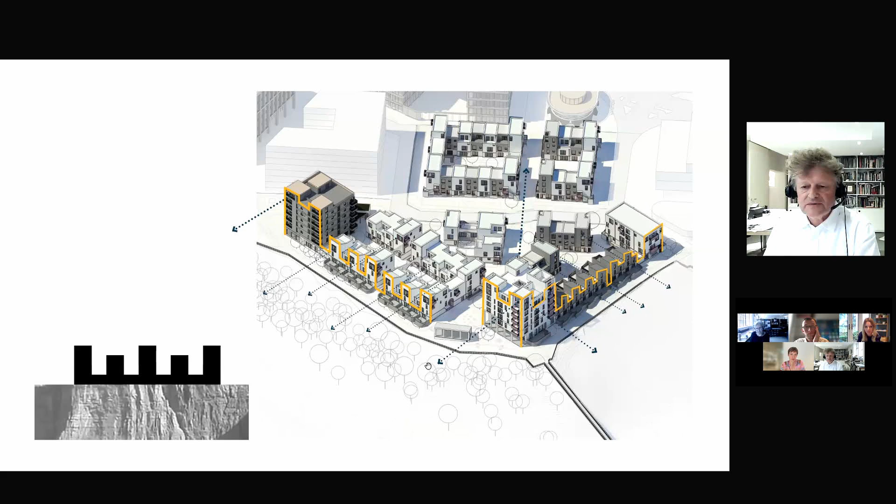Another diagram shows how, rather than traditional developments that attempt to align buildings along edges to maximize views for only those who can afford a frontage, we were concerned about how the idea of a silhouette could afford views to properties sitting on the inner edges of the development, through and between buildings. So there is this layered idea of development on the edge and not one continuous wall.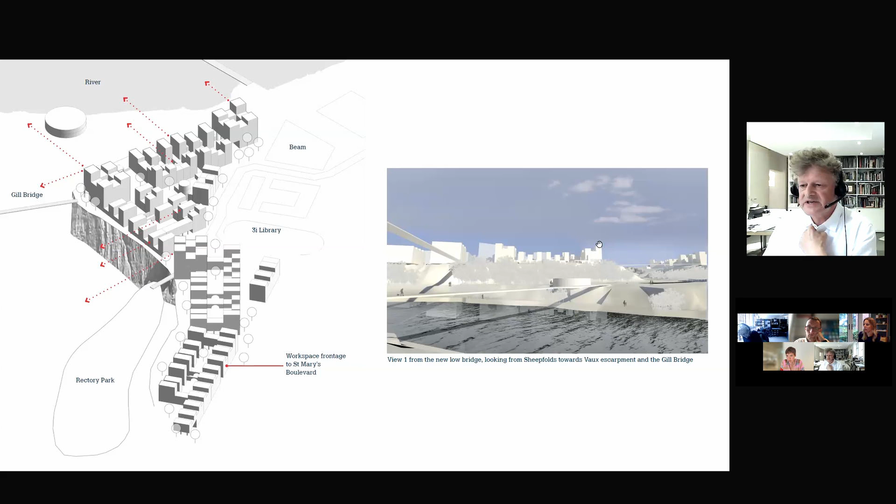From the view on the right, you can begin to see how that same model is building that layered silhouette. This is a figure ground showing how higher density development was working for Vaux, with Mews development sitting on both sides, a promenade along the river edge. This is the viewing pergola or belvedere, conscious of the environment here.

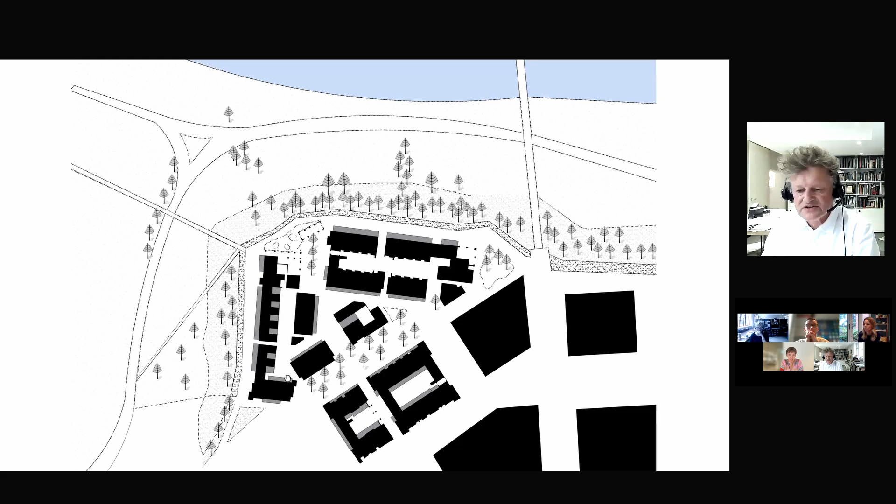The wind blows a lot in Sunderland, and this can be pretty inhospitable in the wintertime, so these are quite sheltered environments for the groups of houses and apartments that sit around them. And then a more detailed plan. Although this particular site is being built at the moment, nevertheless all of the neighbourhoods were tested to this level of detail.

As I was saying earlier, when you drill in to look at the context of Sunderland, you see across Sunderland and across the northeast these fortified pele houses, which are unique to that part of the world. And in Sunderland, the yard house, which made up that grid of streets you saw in the early figure ground. Then the Wearside maisonette, houses that look like houses but happen to be maisonettes, are quite unique to this part of the world, and they create quite an interesting urban place.

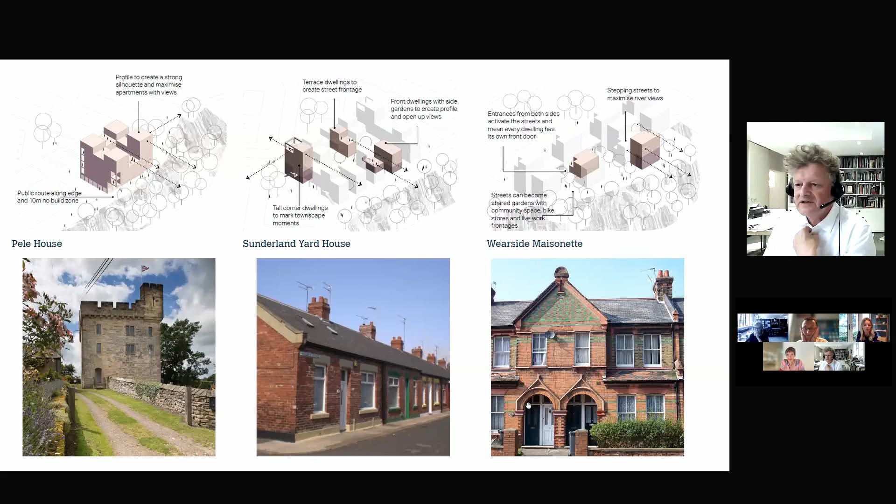We were anxious to reinvent these typologies for our century, for the development we were working on. Here's a diagram - a nice little puzzle that enables you to think about how cities are layered. In a sense, this elevation allows people to see through this silhouette, and there's a layered approach that's wonderful if you're living in the development, but also produces an amazing silhouette when you're looking from the other side of the river.

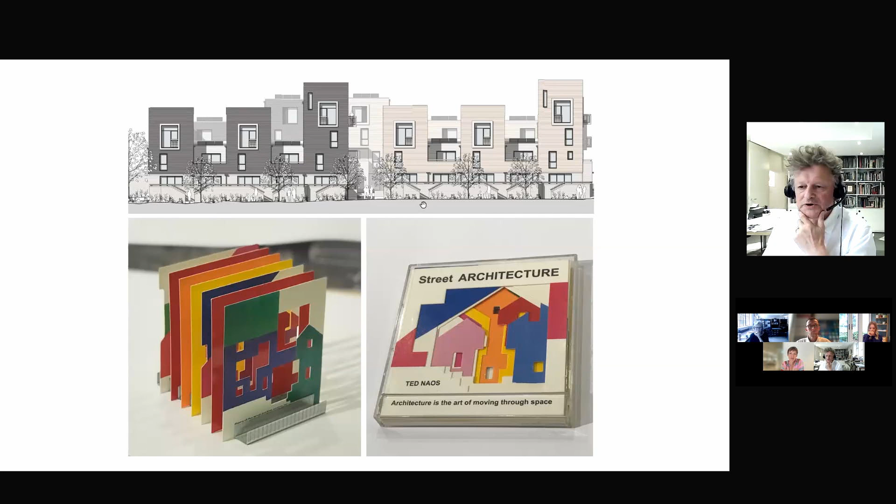And then a very powerful frontage to the Riverside promenade, but entrances up into houses that have double fronts. This is the longer elevation.

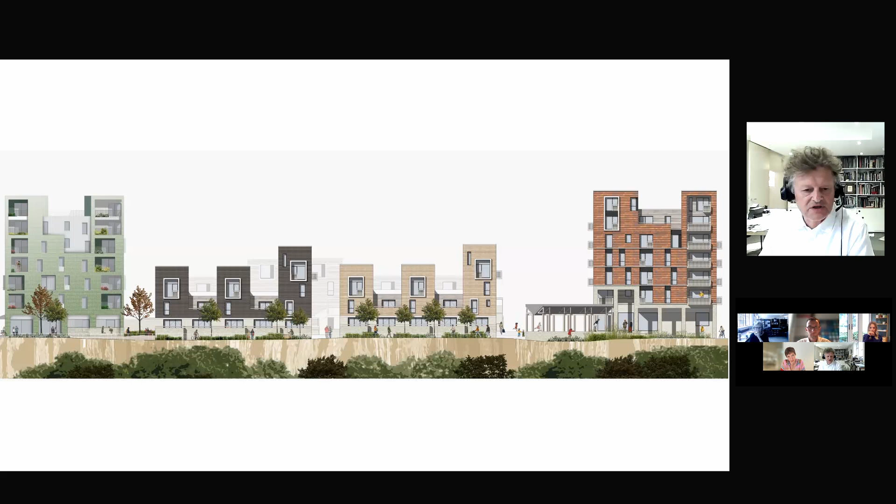We're working now in detail with Mawson Kerr, who have elements to design within the master plan we've created. This is bringing variety to the scheme, and it's been a really great collaboration with that local practice. This is our take on a pele house, and this is Mawson Kerr's take on the pele house at the other end.

Then there's how the master plan and the development we're working up deals with urban threshold - how do we take thresholds that are important, that give people a psychological sense that they're moving from one place to another in a city, moving from a principal busy thoroughfare into a quieter environment that might be about the residents who live there. So through historic devices reinterpreted in our development, we give people a sense that they're moving through a spatial hierarchy that supports the kind of living we're looking for.

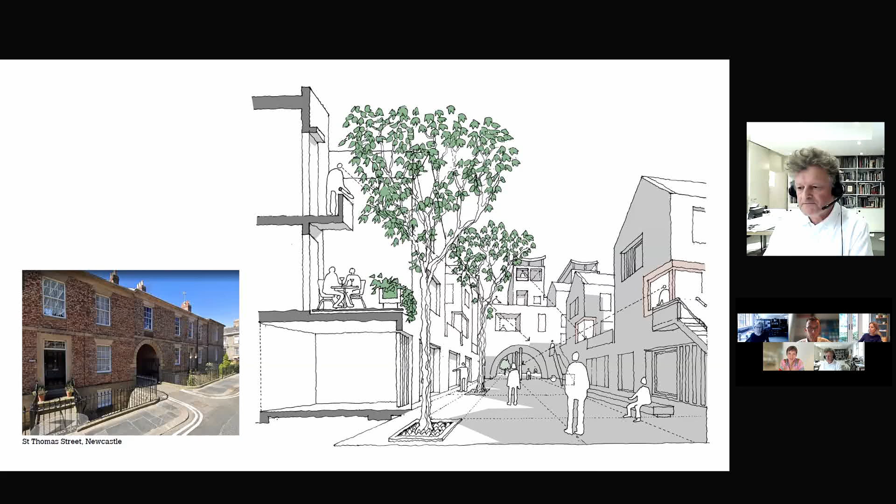Can I ask you to draw your presentation to a close, because there are lots of questions coming in. Oh, I'm drawing it to conclusion.

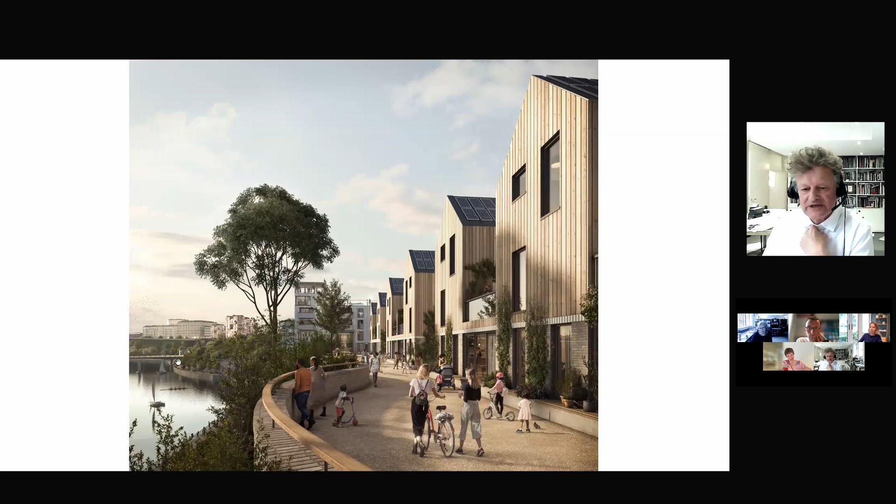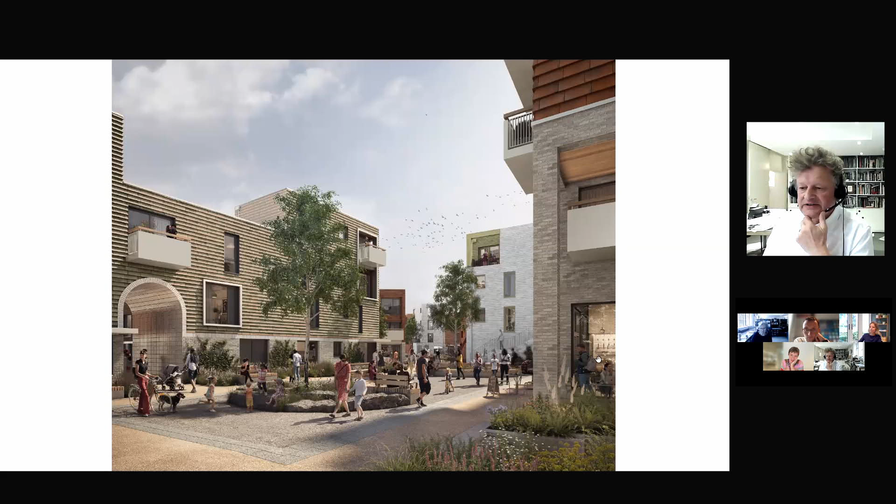So I'm just finishing on a few CGIs. This is Ayres Quay and the New River Promenade, looking down into the Wear when the tide is in, with a Pele House at one end. This is the new square at Vaux, People's Square, which has got cafes and some small business space. Another view from Farringdon Row, looking across the existing bridge that connects into the Vaux Peel.

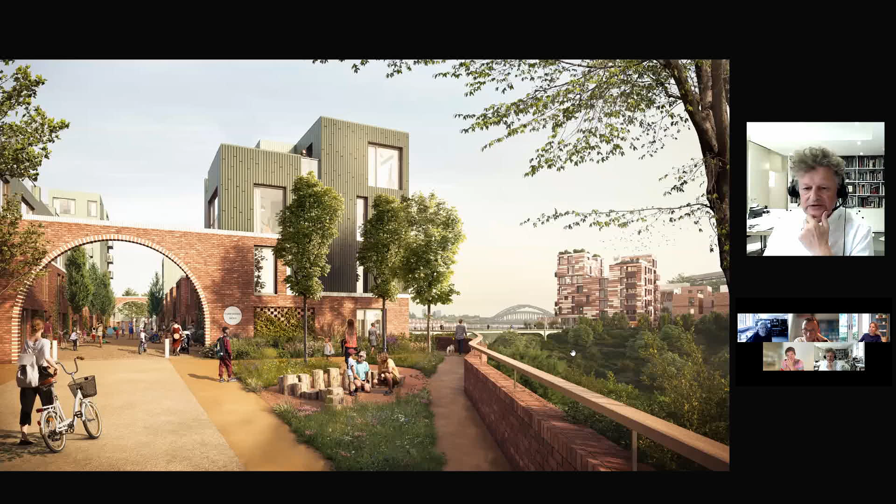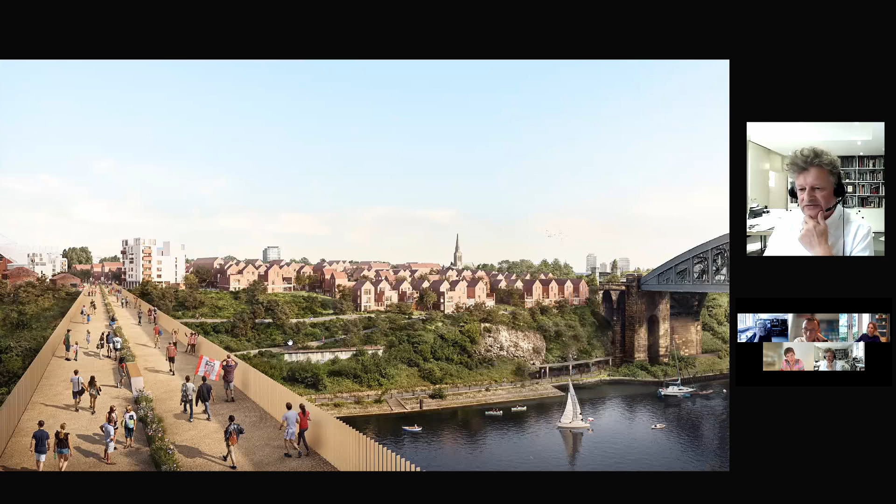And then the new High Line Bridge, which brings you back, taking you towards the Stadium of Light - you can see it up on the left - and the housing that sits on sheepfolds. And then down in Camlin's new regenerated Riverside Park. I finish on the aerial picture of all of those neighbourhoods sat down in the existing landscape of Sunderland. Thank you.

Sorry, Katja. Don't worry, that's fine - you give an architect 10 minutes and they'll take an hour. You know that. I know. Especially me, sorry.

No, and it's great, and there are really good questions coming in as well, and people want to know more about it. The first question is from Jenny, about what measures were proposed to take account of flood risk, even if the banks are engineered, and whether there were proposals for increasing habitats within the river itself. The answer to those questions is yes.

Obviously, flood risk doesn't really exist because we're so high above the river's tidal reach, even with the storm surge, that the natural topography allows us to sit well above any concerns about flooding.

Biodiversity is being massively increased by Camlin's in the way they're thinking about the new Riverside Park. Biodiversity is returning to this part of the river naturally, to be honest, but I know they've undertaken surveys and are thinking about how they might enhance that. What I didn't say was they're also including a quite significant allotment garden in that landscape for the people living in the surrounding neighbourhoods. So there's quite a lot of work being done by the city around biodiversity - not just of the parkland, but the biodiversity of our developments, our high density development.

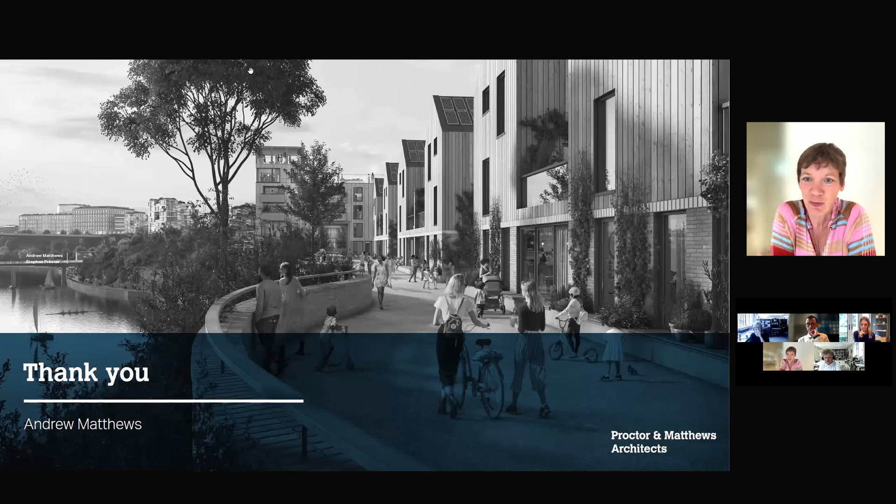Yeah, well, solar is one of the major parts of it. All the homes are using air source heat technologies, obviously. There are conversations about site-wide energy generation, but that's still being discussed. We are using modern methods of construction, and they're trying to drive down both carbon in use and carbon in construction. The green credentials for this project are very high indeed, which is to be fair to Sunderland - they've stuck to their guns around that.

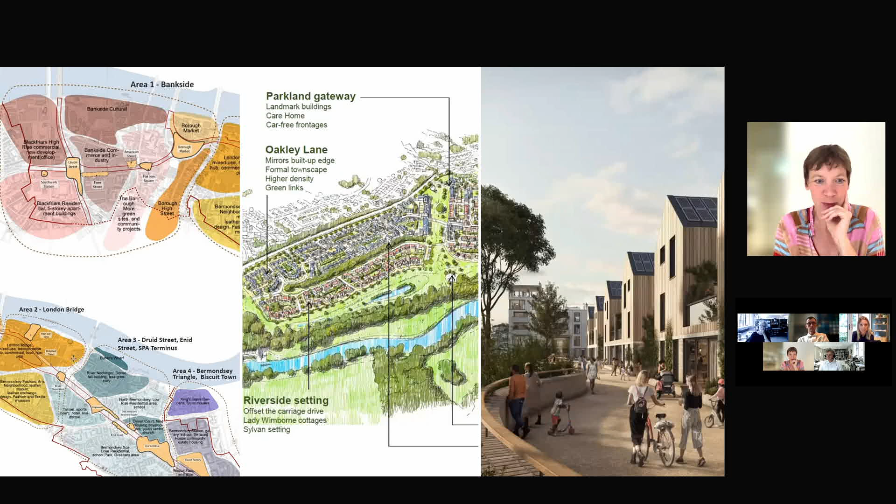Brilliant, great, thank you very much. I think that is all the questions. And I guess now we are coming to the point everybody has been waiting for. Not having been part of the judging, it's kind of as exciting for me as for all of you to hear about these projects.

So the winner, the category winner for the large master plans as voted by the judging panel, is Proctor Matthews, River Sunderland. Blimey, very well done. Thank you, and thank you for the submission. And the judges said that the high density mixed use master plan creates a new city frontage onto the river.

It's a bold vision and really shows how planning can be proactive. Planning in this case is aided by a successful bid - 25 million, I think, is going in there - but it shows what planning can deliver when properly funded, moving the agenda from reactive to proactive. The design team has managed to push the boundaries of this project in a number of ways, from architecture, urban design, to construction and digitization. So well done, and there's our winner.

And it was a difficult decision - all the projects are very different. I don't know how the judges dealt with it, but it was very difficult to compare all of them together. As I said, I would really like to celebrate in person with all of you in Sheffield on the 12th and 13th of October at our National Urban Design Conference, and I hope to see you all there. Thank you for joining us and participating. Thank you very much. Thank you all, very strong competition, so that's fantastic.